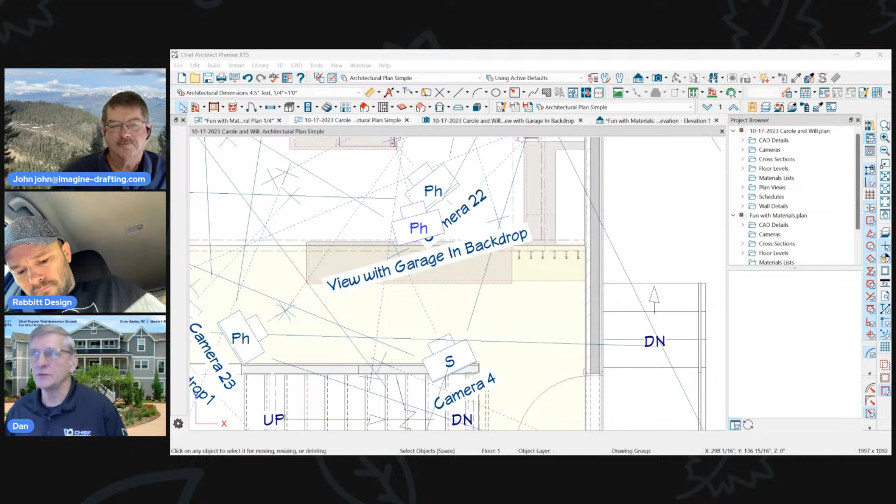We're going to have some fun with materials and textures and all that kind of good stuff, which we've done some of in the past, but I thought we'd just do a class dedicated to that. I know Renee is heavy into materials and textures and all that kind of stuff.

Renee is a, let's turn this off for a minute. Would you call yourself a Photoshop god? Something like that. I've been in Photoshop since 1994, I think. Wow. Yeah. That's before I had my first computer. Yeah, wow, 1994, that is a while ago. Almost 30 years, isn't that crazy? That's almost as long. Well, actually I've been in Chief since '93. So about the same. Cool.

Anyway, we're not going to talk about Photoshop today. Although maybe it'd be kind of fun to do that sometime. Let's not go there, there's so many photo programs out there now. I know Canva is really a big one too these days, a lot of people are using that. So it just depends what you're into.

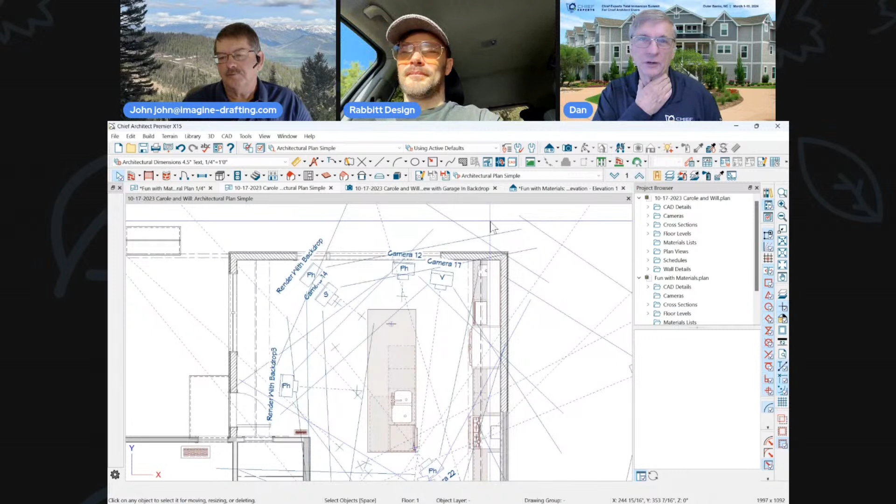Let's talk about textures a little bit. What is a material? What is a texture? You hear these terms, and when you get into a CAD program you might think a texture is something bumpy or that has lines in it, but no, a texture in a CAD program, in any CAD program for that matter, is a photograph. So this countertop that you see right here in this image is a photograph of some material. The flooring is a photograph. The lattice in the back is actually a photograph of their backyard. This is a room addition I'm doing, and I wanted to show them what their view would look like, a small backyard. In that image it appears a little closer than it really is.

So someday I'll figure out how to adjust that. Do you know how to adjust that, Renee, to make that backdrop appear further away? Yeah, you can do some changes in the backdrop setting itself with your edit active view. Is it a change in the image size or is it a change in the backdrop itself? It'd be better if you took it into a program like Photoshop and just expanded it a little bit, made the image bigger. You can also tell it that it's a different degree, so you can narrow the degree or expand the degree to change the bubble that it's being applied to. We'll have to talk about that, maybe cover it in the advanced class we were just talking about doing.

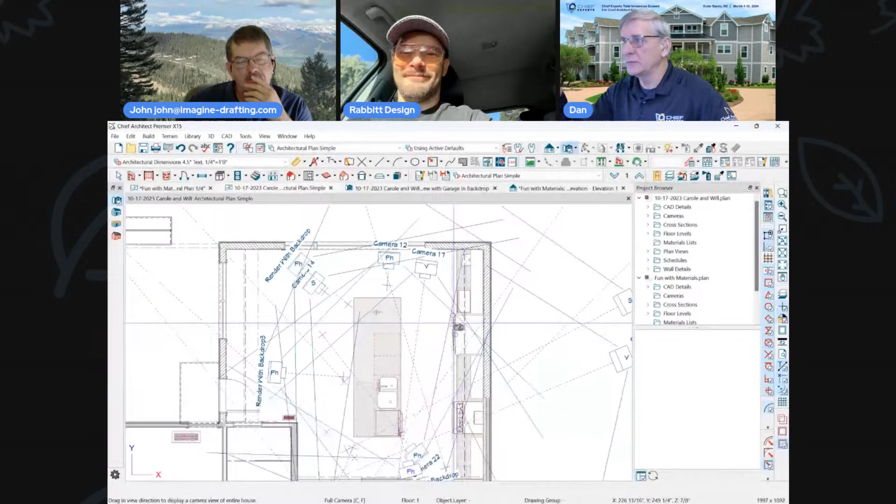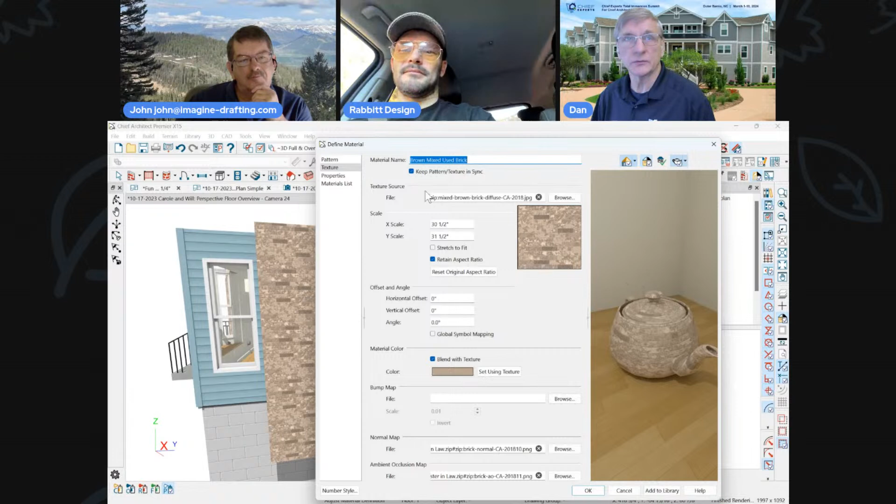But anyway, let's go back into what these textures are. Let me bring up a different view. When we go into a view like this, like the brick right here, you can see the repeating pattern, it's the photograph that is there. When we click on this icon up here, our little rainbow tool, used to look more like a rainbow but it's still got the colors. What is the name of that tool? It's called the Adjust Material Definition. I call it the Rainbow Bacon tool. When you click on that and then click on a material, you can make some adjustments to those materials. You can make them appear bigger, smaller, all sorts of things. One of the things I want to point out is materials have two things associated with them: one is the pattern.

It's the vector-based pattern that you see in your elevations and line drawings. Those are mathematically correct. So when we look at this screen, we see that we're on the pattern - that's the lines that are drawn. And when we look at the dimensions here, we actually see real dimensions, a height and a width. You can type those in and Chief will make those, so when you print this to scale, they'll measure exactly that dimension. So that's what the pattern does.

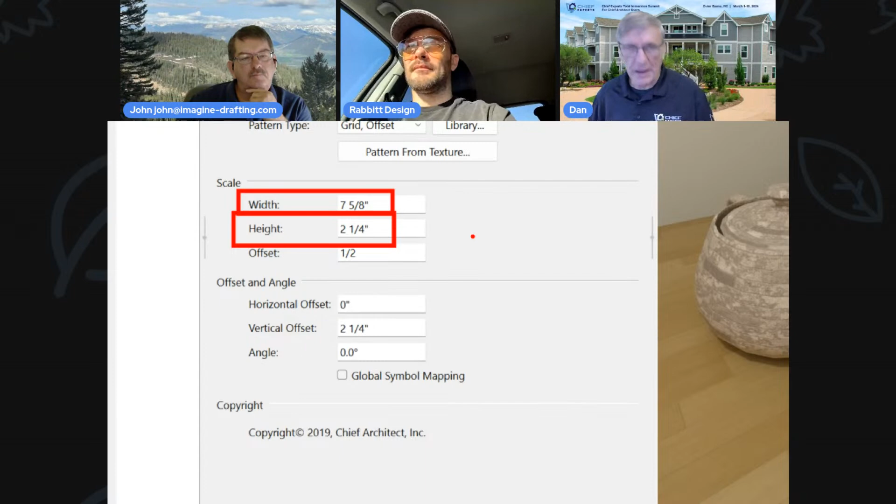Patterns are pretty cool. Chief added a new pattern tool that you can use to create your own patterns if you want to. I haven't done much with that. Have you guys done anything with the pattern tool? That makes it really easy to do complicated patterns without having too many pattern lines, which can really slow down a plan file.

It's nice to be specific about what we're even looking at here. Pattern is going to be a vector-based graphic - mathematical-based lines. Your textures are going to be raster-based images, dots on your screen, photographs. As with any photograph on your computer, there's a bunch of dots that have different colors in them, which is kind of cool how that works when you dig in. If you look at a picture with a magnifying glass, it's nothing but a bunch of dots. So again, mathematical and photographs.

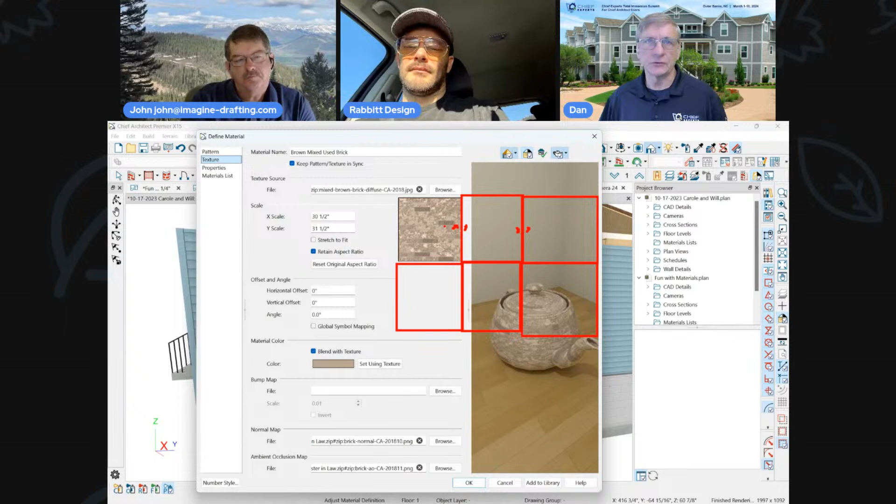What the photographs do is they just tile themselves over the surface like wallpaper. So when you look at the image created in Chief, like for siding and roofing, if it's a really good texture, you can't tell where the image starts and stops - it's called a seamless texture. This brick here lines up nicely with this brick here, and the brick up here lines up nicely with the brick there, so it looks like a clean, consistent image. The siding looks nice because the end of this siding matches the end of the siding there, so it's one smooth image. If we click on that, there's the photograph of the siding, and then of course there's your pattern. So it's simple, but it's complicated how all this stuff works.

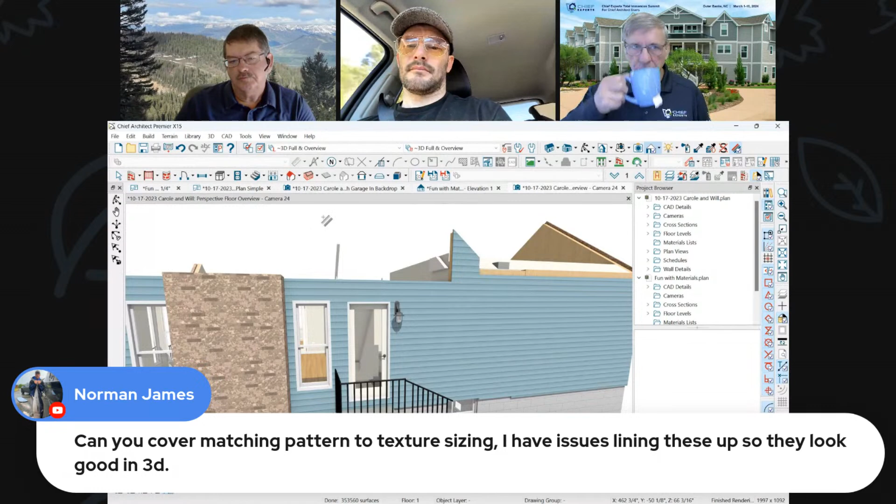Well, while you're in this area, here's a question for you. Can you cover matching pattern to texture size? I'm having issues with getting those to line up. Sure, we can talk a little bit about that.

Let me answer that other question though. Someone sent in asking if I change the color of this brick, can I do it so it doesn't change the grout line? The question is about tile, I think - same difference. So when you use the rainbow bacon tool and click on a material in your plan to adjust it, go to the texture tab, there's a little thing called material color that you can click on, and you can adjust the color of the material.

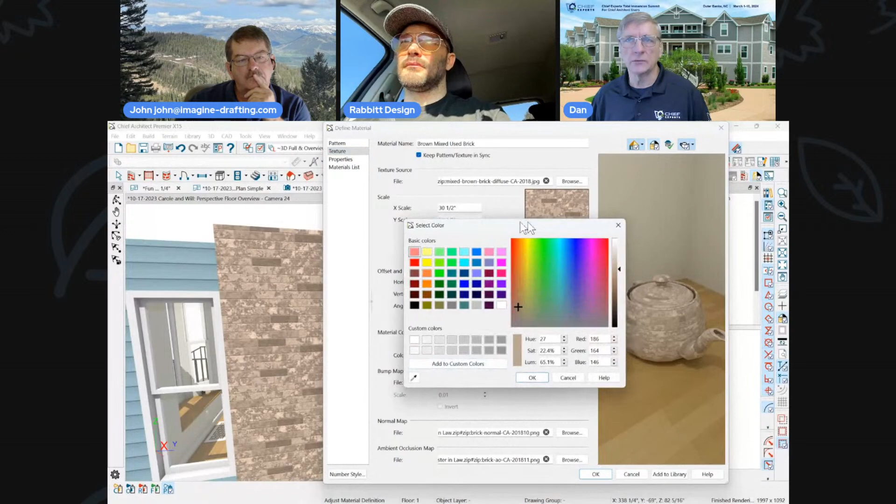So let's click on that color swatch, and I could take this eyedropper here and go drop it on a color. If you actually have a color swatch from Benjamin Moore or something, you could just drop this on that color swatch, and you'll see how it changes the color in the dialog. So when I change this, the brick is now going to become blue, it's going to look like that. But it is going to change the underlying image as well, so it's going to change everything to that new color.

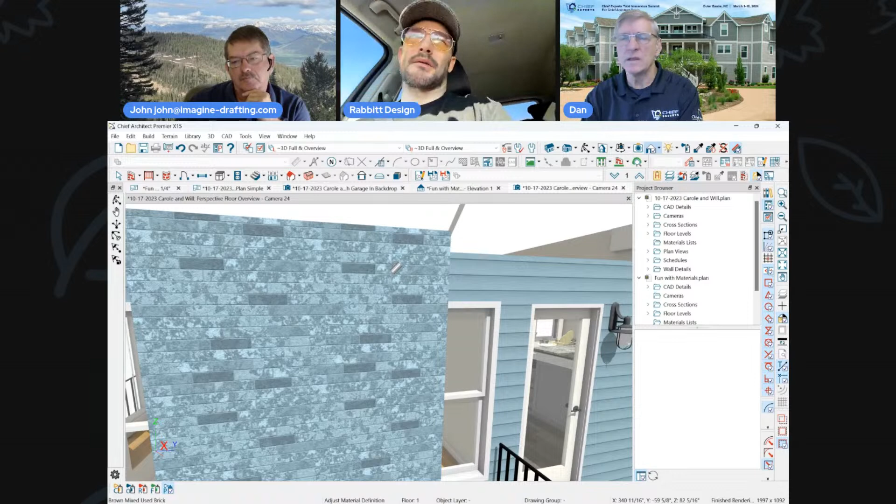That's what it does - it's like taking this picture in Photoshop and changing the base color of it. What do they call that, Renee? Where you change that color? I don't remember. Chief's essentially doing like a blend mode - yeah, it's a multiply. They're multiplying the color you're choosing with the color that you've already got in there.

And we're hoping we change some things there for X16, but we'll see. So you'll be able to pick out a color within a material, you think, to change something? No, I don't think so, but I think we'll be able to do a little bit better of an overlay where it's not affecting the blacks or whites so strongly - it's more affecting the gray tones, but we'll see what we come up with.

Sure, all right, well let's undo that. So what was that other question you just had, John? Matching the texture to the pattern.

That's a little tricky. Okay, so watch what happens. Let's say that this brick does not have a pattern, a vector-based layout for it, and I click this little button here that says pattern from texture.

Pattern from texture. It's going to look like this. See how it's actually kind of where it sees all of these different images here, it's kind of making that part of the pattern. That's going to create a lot of lines in my plan. Now I can adjust that so it makes it simpler, not as complex.

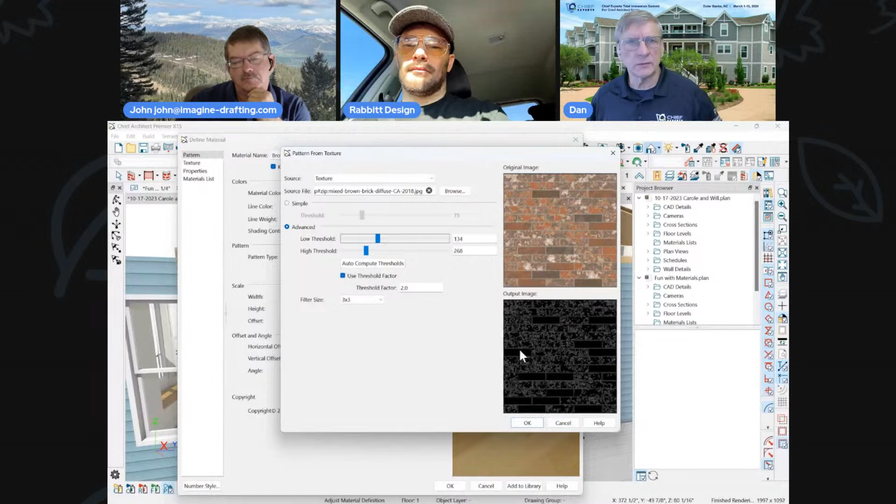Is there a way to invert this? I don't remember how this works. I don't use this very often because it doesn't work that well. No way to invert it. And actually, I really discourage the use of that tool because it creates so many vector lines that it can really cripple a plan. The math is just going to go crazy.

So if I look at this now, see all those little lines in there? Chief now has to calculate all of those, mathematically calculate where all those lines are. So it really takes a chunk out of the program. If you have a fast computer you probably won't notice it, but yeah, it will definitely slow it down.

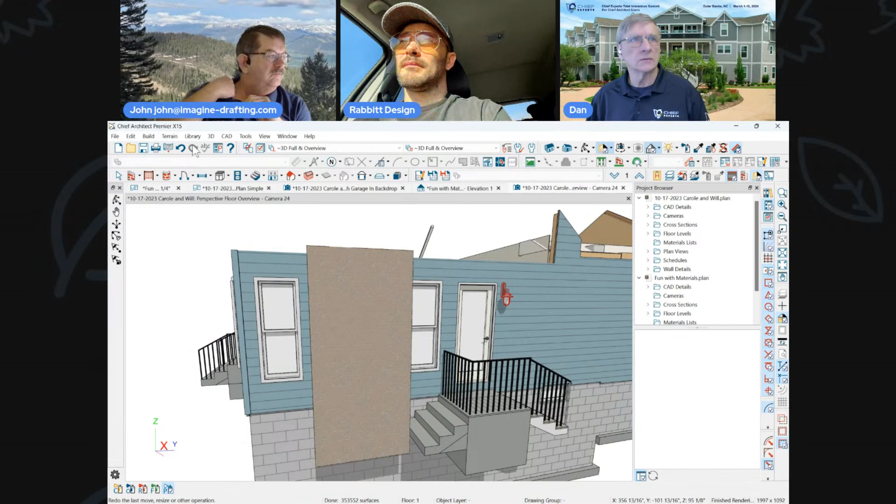So how would you handle that, Renee, when you need a pattern? Will you open your brick texture again, and then in your texture panel—this is where I literally just count the number of brick in that image, top to bottom. If I know how many... I can't quite see it, so I don't know how many brick are there, but let's call it 5 brick.

I just do 5 times 2.5 if I've got a 2.5 brick, and that should be my Y scale, right? Once I've specified that, it's now created a brick that's 2.5 inches tall. Then you can go to a pattern, pick a grid, and say that it's 2.5 inches tall. And then the last bit is maybe you have to change the horizontal or vertical offset to get it to line up perfectly.

Yeah, you're talking about down here, adjusting that material to move it around. We were just discussing that a little bit here. So uncheck 'keep pattern and texture in sync' at the very top.

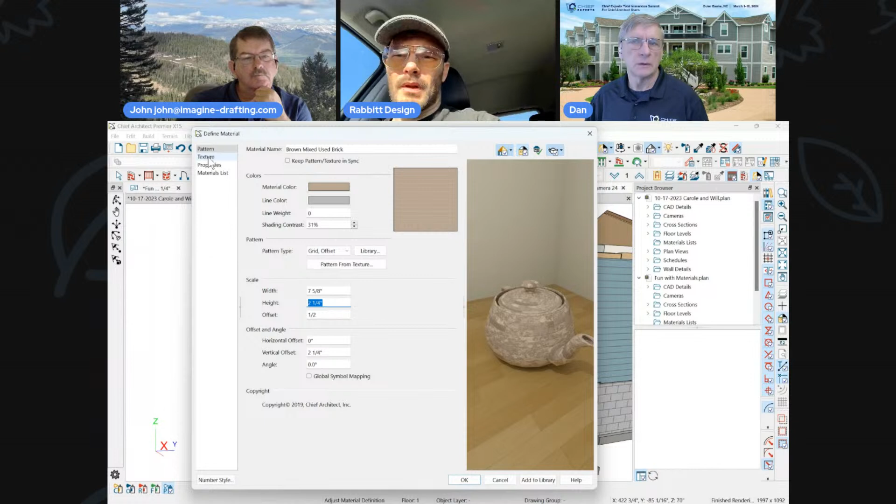Okay, and now you would specify whatever your brick size is, and you'd have to know exactly what it is, so you'd have to count the number of bricks in that image. 7 5/8 by 2 1/4. So I will put that number here.

Now go to—you'd have to count the number of rows of bricks in the image and multiply it by that number, 2 1/4, or 2.5 with the grout line, whatever. And then that would be your Y scale for the pattern this way. Okay, that would be this number to get it right.

You know how I did this? I actually created this brick—a cheat. I go like this, I take and I go into an elevation. And let me get to the right plan here. Where am I at? Come on.

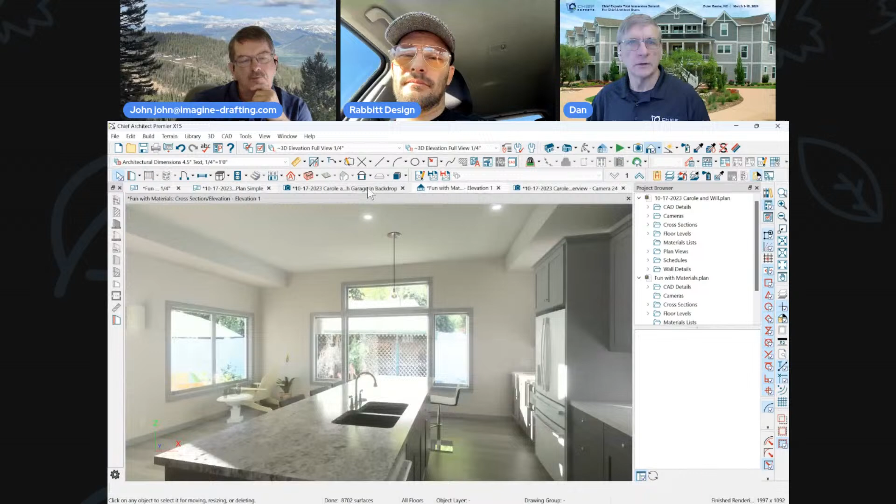Where to go? Here we are. Okay, so it should be a chimney there. So I go in here, and to get the pattern I want, I'll switch to a vector view—well no, to get the image pattern right, I'll just go ahead and draw a box on my wall like this, the right size.

So if this needs to be 8 by 2, I'll just keep it simple, even though I know it's not that. And I'll just kind of put it on top of one of the patterns here, even though I know it's not quite right. Then I'll switch to my vector or standard mode, and I'll just take that same brick and put it where I need it to get the pattern right.

And then I'll just go to my tool and start adjusting these numbers a little bit until that fits. So if I add an inch to this, and I'll leave the... you might have to turn retain aspect ratio off. Okay, so now I just stretched out my pattern this way.

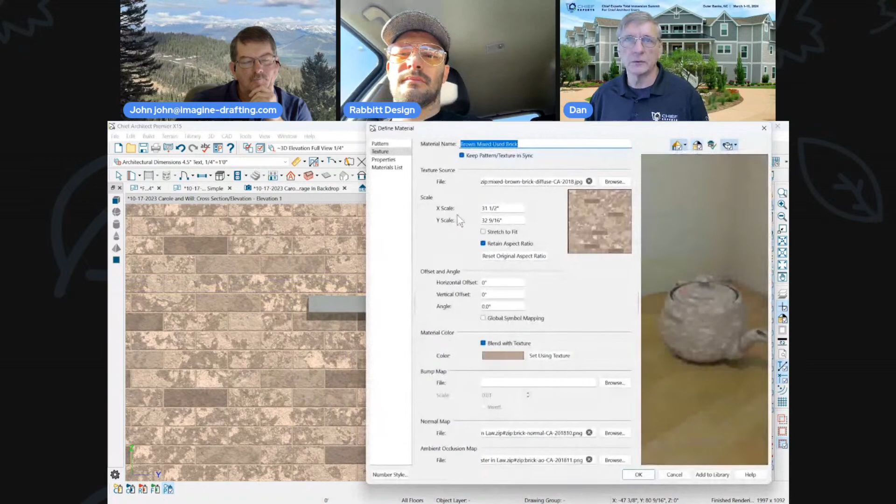So again, if I go in here, let me just make that bigger—I'll make that 50, and you'll see how you can stretch the pattern one way. Actually, I bet that turns itself back on. You got to watch that because it turns itself back on every time. Let me go turn that off. So this is how I've always done it.

I'm not into math, so I just go like this, and it's always worked great for me. See how I can stretch that brick out but I can keep it the same height. So that's what I'm doing. Just imagine you're taking that picture and stretching it, and that's going to stretch the pattern that's on the picture. So you can take any tile and do this to it.

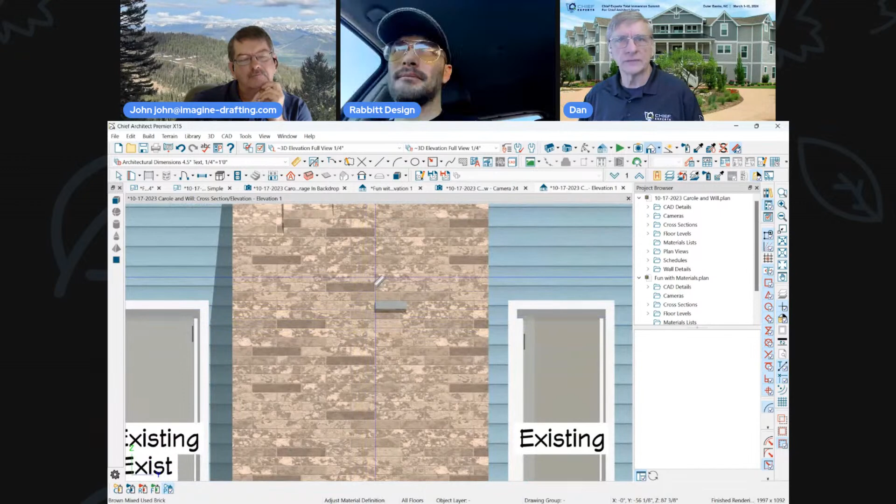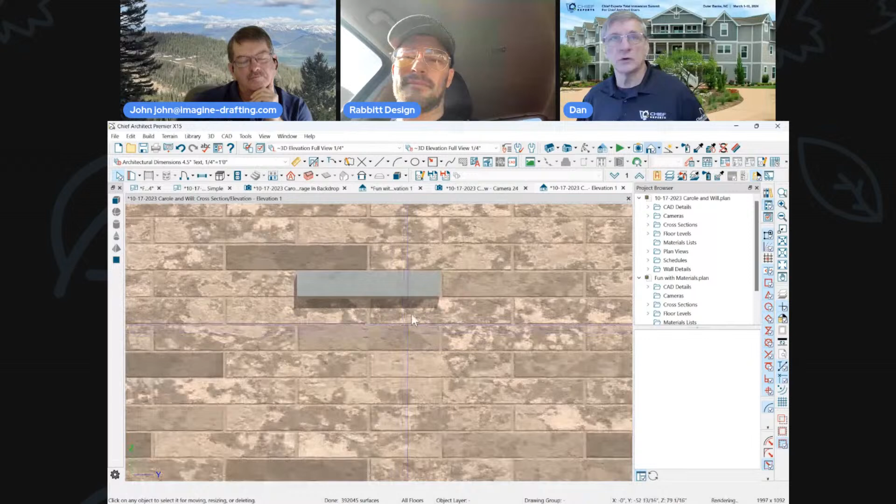I was doing that with some bath tile yesterday where I needed an 8x10 and I had a 12x12 tile. So I was just changing the image, and then I put a little 3D box on there so I could check the size. If I like that size brick, I'd make this like this, and stretch that out here, that's 2 inches by 2 1/8 by 12 and a half. And I would just go into my material and change that under the pattern, so that'd make that 12. So you just sneak up on it. Pretty much. It works.

So the value in doing it the mathematical approach is that we can get the pattern file to match up perfectly very easily. Yes.

So if we had more time and you weren't driving your car, I'd say show me that, Renee, but it's probably not a good idea right now. Well, here, no, do it. We can do it. And this is a pretty simple approach.

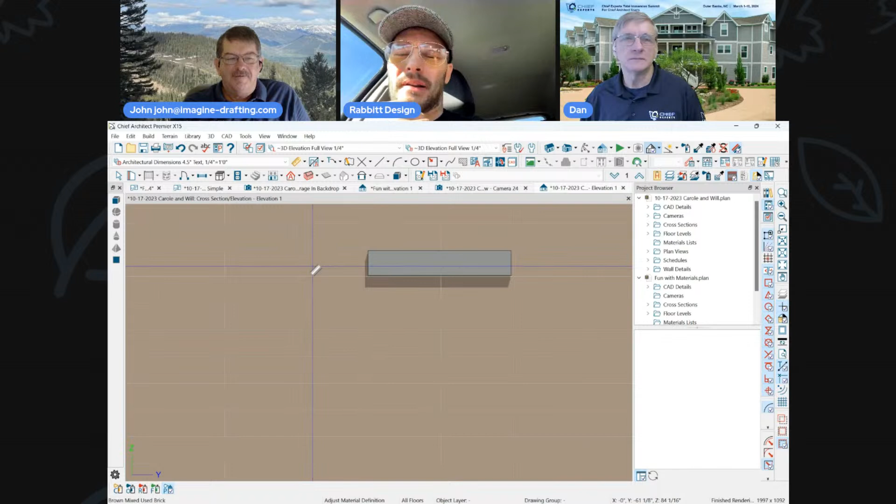So pull that adjust material up again. Okay, go to the texture panel. Uncheck keep pattern and texture in sync. Count. Someone tell me the number of height. 7, 8, 9, 10 rows. 11, 12, 14 high. Okay, now do in your XY, do your 14 times 2.5.

14 times 2.5. Get my tab key. This should be your XY scale, not a horizontal offset. No, that's true. So I'll just put it there. I'll just uncheck that, put that there. Let me take that out of there.

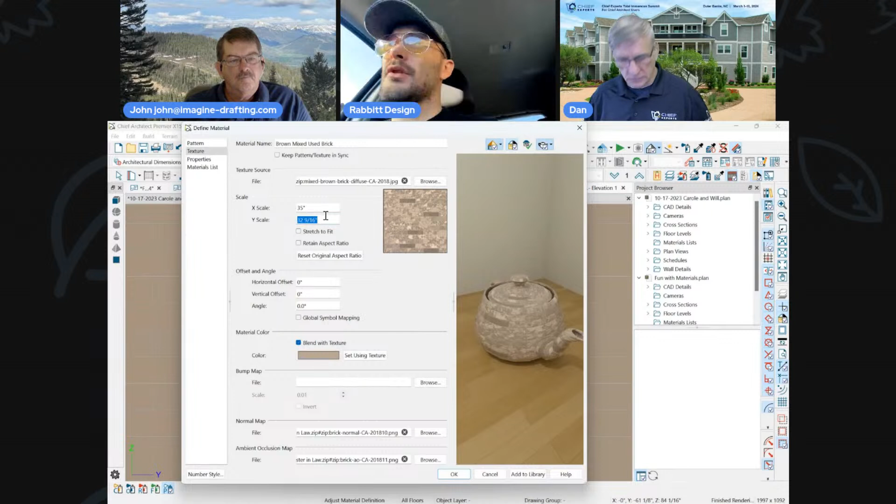Okay, but you see how I multiplied that right inside one of the chief boxes? Now we need to go 1, 2, 3, 4 wide on the brick. Show me the bricks left. Yeah, there you go, 4 times 8. You put those in the wrong way.

X is on top, right? I can't quite see it either, but X should be the scale, the up and down should be... so that should be 35. And this should be 32 by 35. Okay, those were the numbers we just put in. So that math I just did now.

Now go to my pattern. Now go to your pattern. Pick a brick lay. I call what? Is it already a brick lay? I can't tell. Pick a brick lay pattern.

You talking one of these? Yeah, what do they call it? I can't remember. It's just a grid now. They call it brick, they call it grid. They used to call it brick, they don't call it brick anymore. It's called a grid. Is it grid half off or something like that? That's right, we need the grid that is offset.

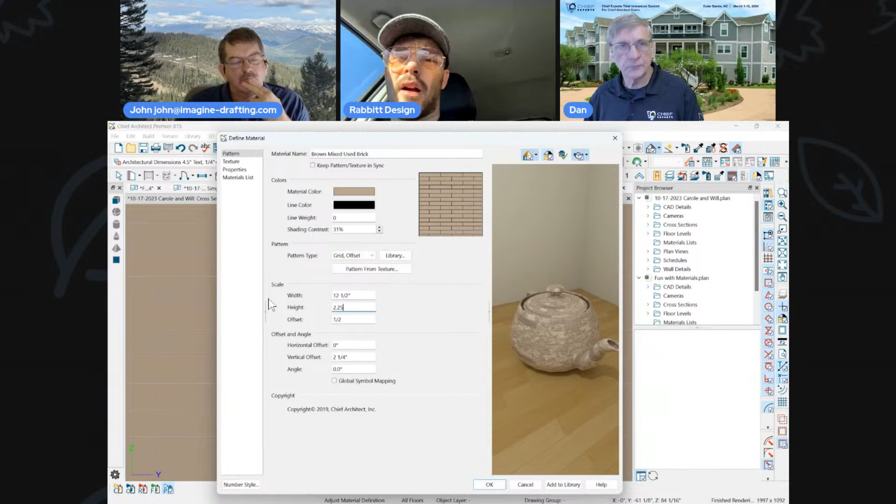Yeah, there you go. Let me make the lines darker so you can see the lines. Now you can see the lines. And then again, the height. Now we're adjusting the height of the actual brick size, not the image. So this would be 12 and a half by 2 1/4, 2.25. There you go. And now once you have that set, you should be able to keep pattern and texture in sync, and if you change the pattern size, it will change the texture size.

Okay, so there's my brick. And if I change, so that's lined up. Let's see if I switch to my standard view. No, they're not quite lined up yet. So you might have to change the offset just a little bit. Just make sure you're unchecking the pattern in sync.

You know what I did is I put it on the 8-inch brick, not the... okay, I did it wrong. I did the math wrong. I did 8 inches instead of 12 and a half. So, because that's what 12 and a half is. But I think I get the idea.

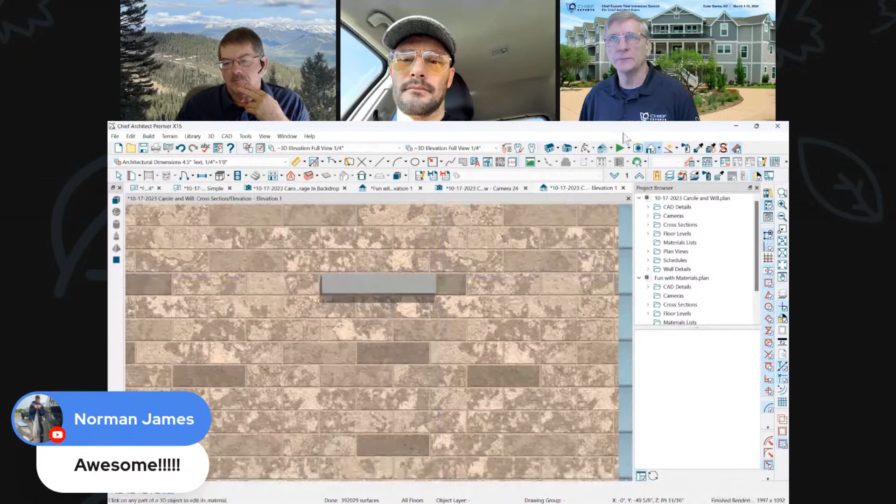Okay, let's move on. Norman feels like there's a specialty tile grout tool coming on, Renee. That's Photoshop. No, actually, that's Substance Player. Dustin Cruz already made that for Chief Architect. There's a question about that too. So, Norman, about talking about that.

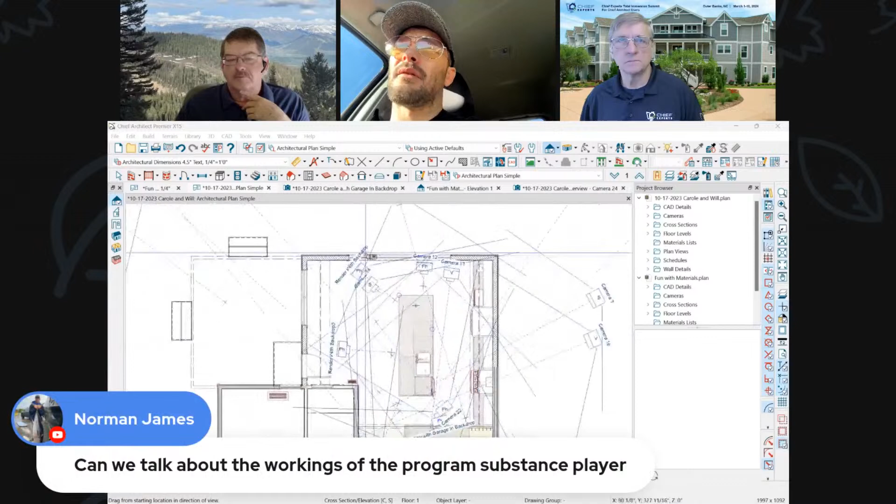If you want to make your own tile, go over to Chief Talk, in the symbols and content section. It's pinned as the third post from the top, and it's the Substance Player. We looked at that when we were in Coeur d'Alene. That was pretty cool. So you just go to Chief Talk, let me go run over there quick.

Wasn't there some talk about the guy that does all the materials? If you need a material, just let him know, and he'll do it. Yes, that was Dustin Cruz, Dustin at chiefarchitect.com. Send him an email so you don't struggle with your materials.

If you want a new material, just let him know, and he said he'd make them. So is that under symbols and content? I think it was, wasn't it? Yeah, so you got to be signed in. Am I not signed in? No, I'm signed in. Custom material generator with substance players.

That's the one you're talking about? Yeah, that's it. And they have a wood builder in there, textile builder. It's great stuff, they do. So if you're into creating your own materials, you could get this tool here, and here's all the downloads that you would need for this.

I don't know, did they have any direction for this? Any videos or anything? I don't remember if they had. Yeah, he's got some pretty elaborate direction in there. This is not for the faint of heart. This is something, if you're serious about materials and you want to get into it, Chief is giving you some tools to do this. It's pretty cool how it works.

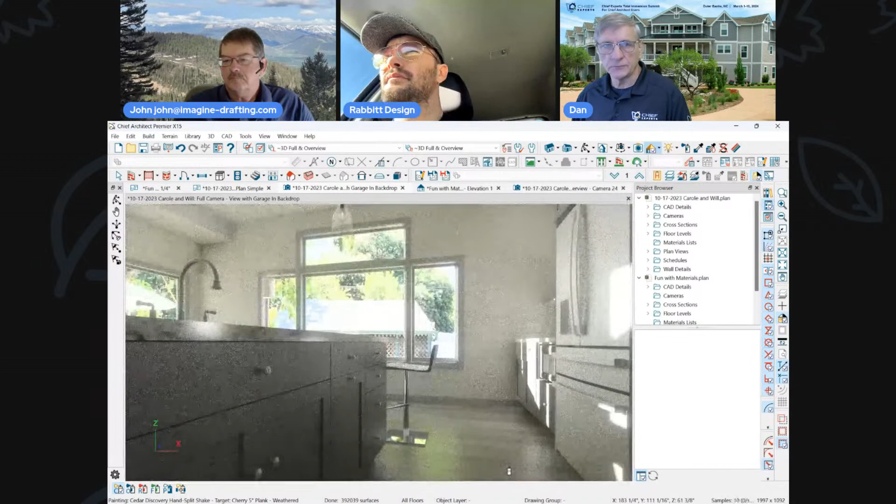Someone was talking about their materials looking flat. Let's see if we can address that a little bit. Let's go into a 3D view here. Let me just do this one with the backdrop, and let's make the flooring look like it's got some definition to it. You can see it does have a little bit now of definition. Let's try to give it some more. So Renee, how would you do that?

You got to make a bump map and a roughness map. So how do we make those? We need the substance tool. Substance will do it for your flooring, absolutely. So that tool is really great for that. Otherwise, I'd be in Photoshop making it.

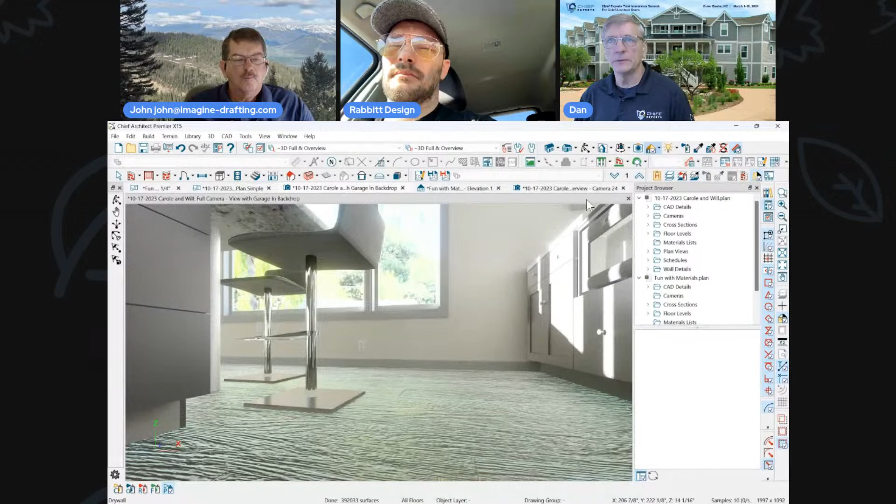So I'm doing it right within Chief without doing anything more. It was really... let's go 0.1. Some materials this works for. Obviously for this flooring, it's not what I want. That's going to be a little bit more advanced as well, so let's not go there right now.

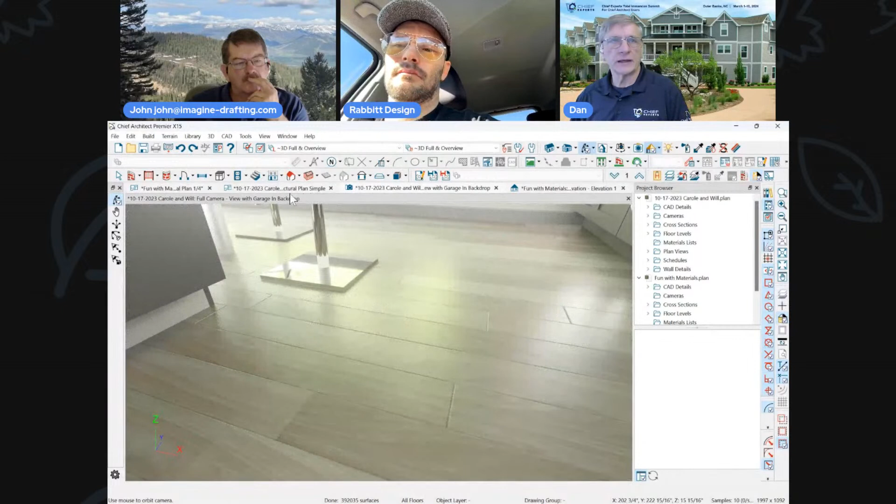As you can see, when you're into that world, and it's all coming back to me now from our meeting this summer, the actual wood look flooring is one image. But there are other images attached to it that produce that roughness. They don't look like the wood, they just look like roughness, and that's what gives the material its look. Chief combines those to give it that depth of field look. So it's kind of interesting how that works.

Let's go do a couple other things, unless you want to comment on that some more. When we get into this kind of stuff, we're touching into third-party programs like Photoshop. I had a really long conversation with Ryan, who's head of development for the rendering part of Chief, and maybe we can integrate some cool features for the next versions.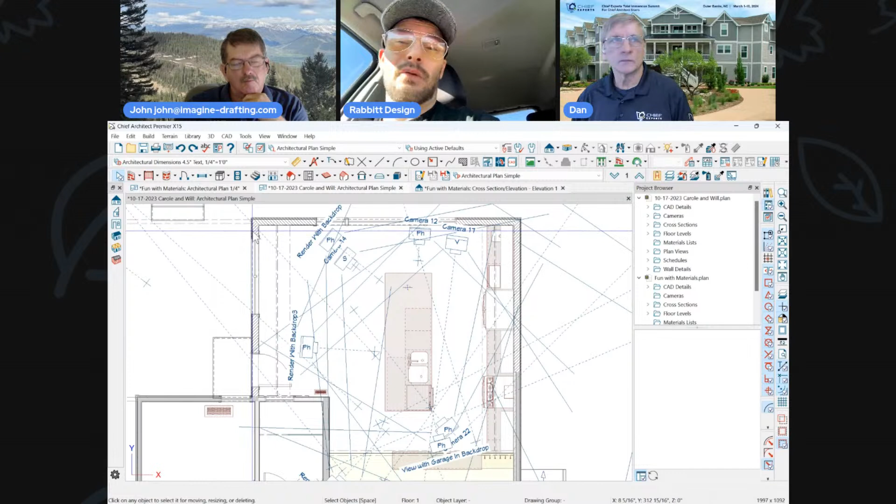Okay, let me talk about a couple of settings you should always make in your renderings, and then I'm going to show you how to create some of your own materials. When you're into a view like this, there's a few adjustments you need to make for Chief to work a little bit better. First of all, you have to switch to PBR, the physically based rendering. So this standard view looks like that.

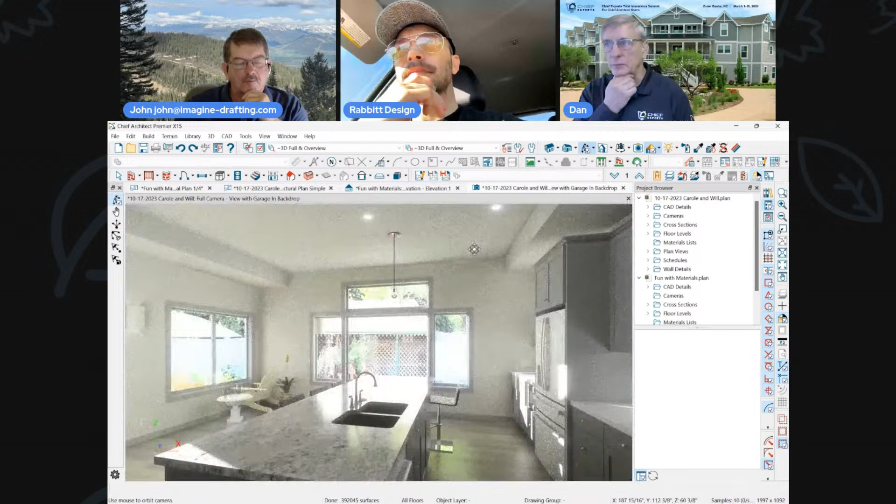In most cases, that's fine if you're just talking to the homeowner about something. But if you have a good computer, I've got a 4090 video card on mine and tons of RAM, so I've got a nice fast computer. Whenever I move this image, it regenerates quickly, and boom, there's my image. It looks good. So that's the first thing I've done, I've switched to physically based.

I think, Renee, you have yours set up to just come up physically based, don't you, whenever you bring a camera up? Some of my cameras, yeah, or I have it on the alternate. And that's a default setting under camera tools.

So if you want all your full cameras to always come up with physically based, set that in your default settings: click the little wrench icon, go to default settings, camera tools, click on the one you want, and change it to the view you want. So if you want all your 3D camera views to be physically based every time you drop a camera, that's all you have to do to make that switch. Now, that only changes it for this plan, not the whole program. So if you want it to always be like that, do it in your template.

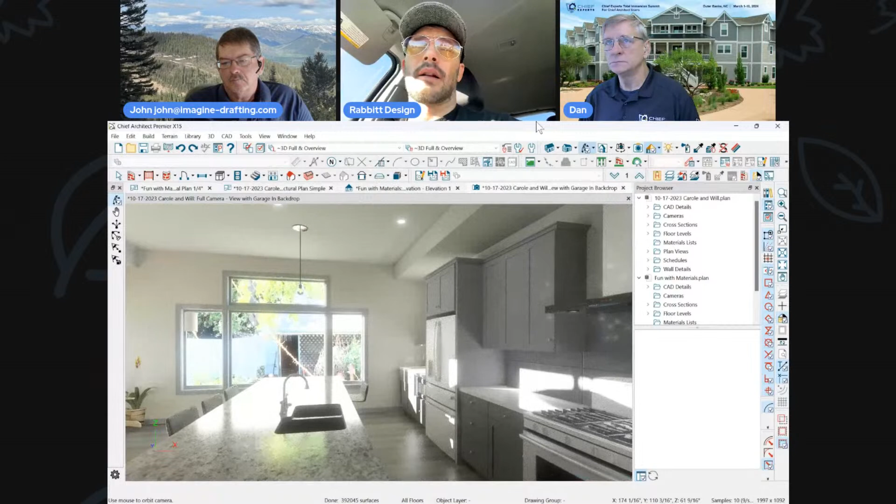And then I like to do it as the alternate method, so if we right click and drag a camera, it'll do physically based. Oh, okay, that's a really good idea. I like that idea, in fact I should set that up in mine.

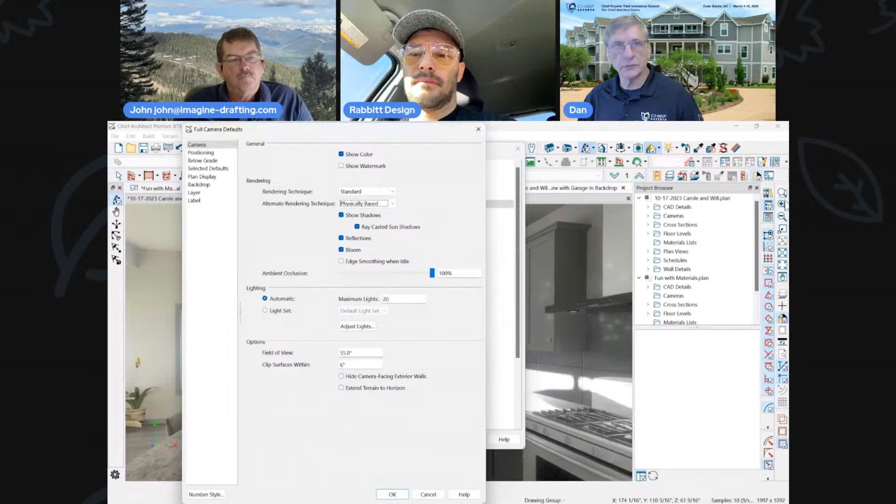So if we go to our camera tools, I don't even use that, but now I will. I'll have standard here, but for my alternate I'll do physically based. So here you do your left mouse button for the standard view, and your right mouse button to bring up the alternate view. I'm going to change that in my template, so when I go back to my floor plan and want to bring up another view, I'll just drag my camera with my right mouse button instead of my left, and that'll bring it up in physically based, so I don't have to switch it.

Thank you, Renee, I didn't even know that. That's pretty cool. Well, I think we can go home now. We learned one thing today.

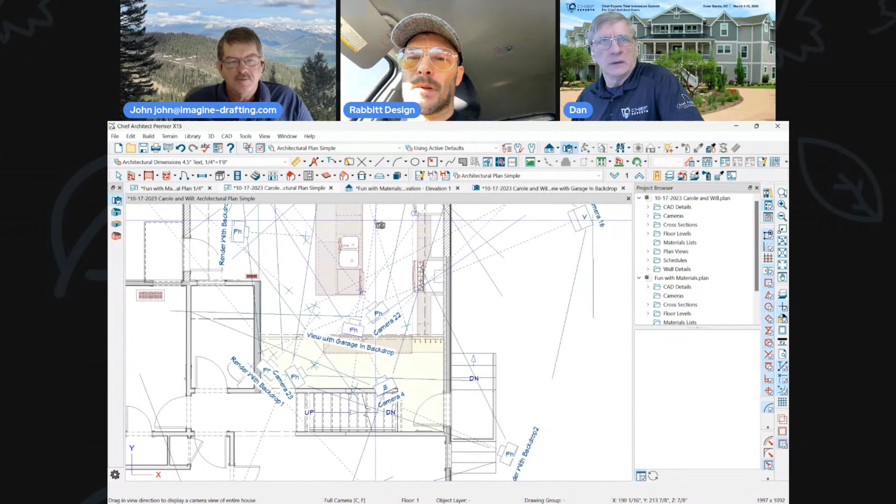So all of your cameras have that setting in them, so you can make that switch to whatever you want. Let's see how that works with the overviews. Let's go into there for a second. Perspective full overview, we don't have an alternate method there because you already know to use your right mouse button, it just brings up a view.

You have an alternate between elevation and backclip? Yes, those two do, and backclip has the same thing. It's just the ones where when you click a button it pops up the 3D view, those are the ones that won't have an alternate. The perspective overviews take up less in terms of rendering, so I like to just set those to ray trace.

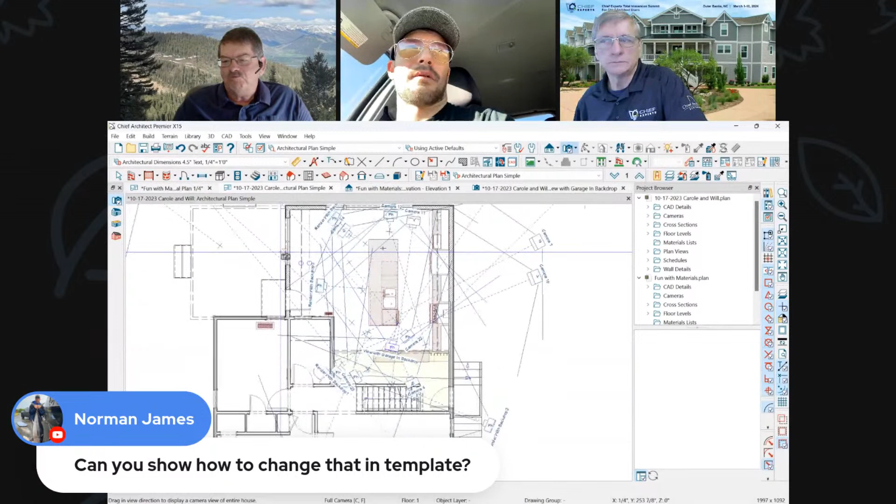Can you show how to make that change? Keep in mind, if we're on a Mac, we don't have that ray trace option. Oh, that's right. What do you want to show to make that change in the template?

So if you go into your preferences, and go to new plans, whatever's listed under plan template, that's what you're opening every time you open a new plan. In here I have my template, my X15 plan template, so I could actually open that actual file, or browse to it.

Does this allow that? No, that stays open, could I open it from here? I don't have it here. Oh, you have to go browse. Never mind, go open that, whatever's listed there. You go open plan, then open that template, make your change. A template's just a blank plan, nothing more, nothing less. Make that change, close it. Next time you open a plan, that setting will be there. It won't affect any plans you've done in the past, only future plans when you go file new, opening a copy of whatever is listed under that dialog.

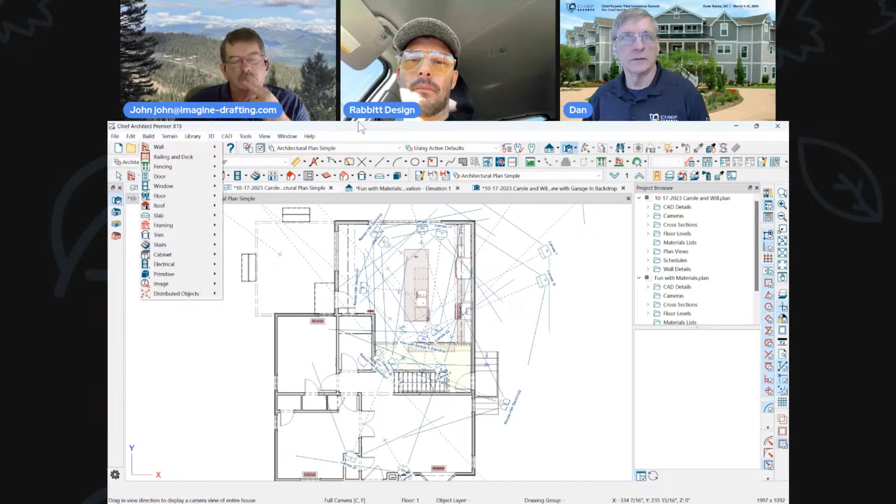All right, let's go do a few fun things. What are we doing? Okay, we've got 25 minutes.

I set up here how to do this kind of stuff. You guys ever have an interest in bringing in pictures of people, or putting them on TVs or signs, creating your own signs, that kind of stuff? It's really easy to do. You could do this with any image on your computer. Of course, the problem comes in if you need to show it in a vector view, then you're not going to have the vector image of those things unless you have a CAD drawing of the sign you're creating. So we're going to understand that difference between vector and render, whereas this is rendered.

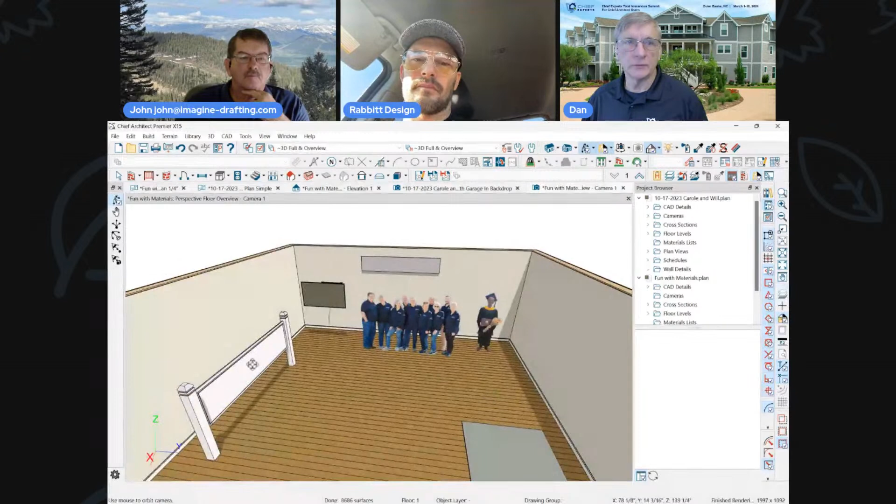Now, if I switch to vector view automatically, see all of the images on the signs go away, because that's the material. This is still going to work in a vector view. So those things work fine.

And those are kind of fun images to play with. They're really easy to do, but you'll see they're not really 3D people, they're just flat images, which a lot of Chief trees and things like that are flat images too. Although they have more and more 3D stuff now. They're doing a really good job with their 3D trees. I'm not quite sure how they're doing it, but it's kind of like their trees are drawn in little square boxes that attach pictures of leaves to them.

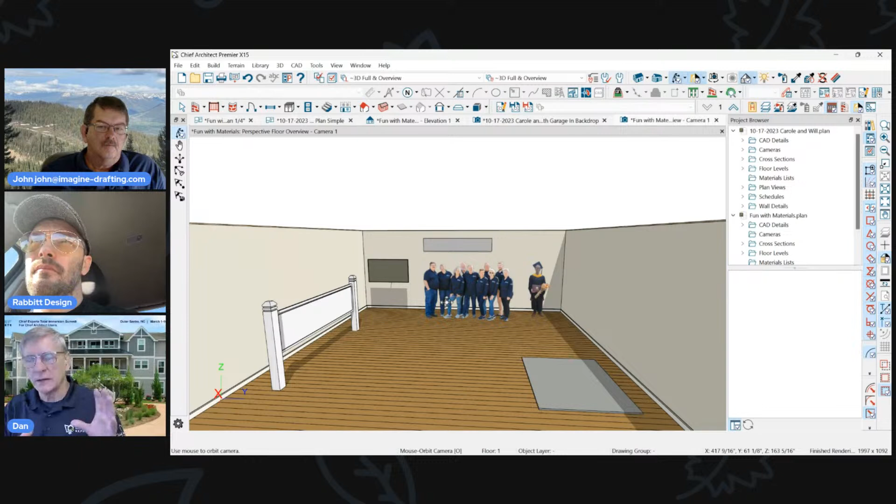Am I seeing that right, Renee? On some of their trees, say that again. So in some of Chief's 3D trees, when you put a tree in and it's 3D, and you're in a render view, it looks like real leaves on the tree. But when you go to a vector view, the leaves look square or rectangular. It's a PNG image, which allows transparency, and it's applied to a square. Yeah, much the same as this, where you're just creating that kind of an image.

So I'll show you how to create some of these things. They're kind of fun. There was a question about grass along those lines.

Okay, grass. Well, let's cover this in X16. In X16, I believe they're giving us a clipping mask, so that's going to make it a lot easier to do those kind of things. So I assume what we're talking about would answer this question.

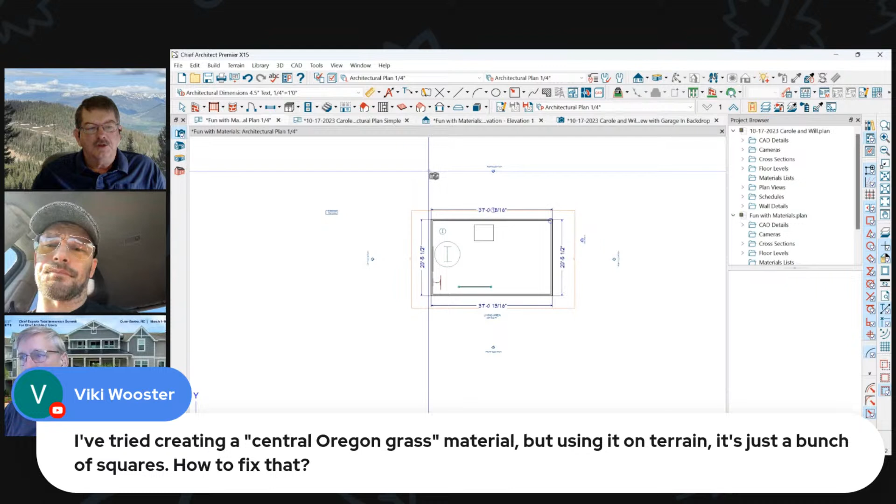All right, let's put some terrain in. This is X15 only, older versions don't have that. So when you bring up your 3D view in this version, let's get out of these. I'll say no. All right, so when I bring up a 3D view of this...

This isn't too bad, but you can see the pattern here, you can see where they repeat. I can't quite see it this direction, but I can definitely see it here. So that's the images repeating. But the real question was, how do you do real looking grass? So Chief has given us a new tool that we can do that with.

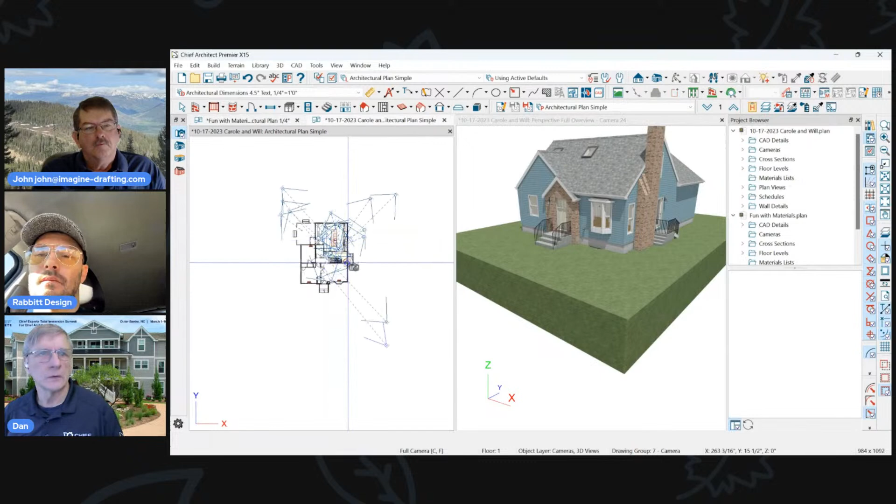So if I go to... where'd my terrain go? Oh, I'm in the wrong one. No, where'd it go? Oh, I have it turned off. Let me switch to this one. Oh, let me switch to all on. I had my terrain turned off, I was messing with this before. Which one did I have it turned on?

All right, sorry, I had it turned on before, but then I turned it off. Let me just go into my layers and turn it back on. Terrain perimeter... oh, it is turned on. Do I have it on the lower level? Oh, come on. Well, let's go switch to all layers on. I know I have one in here because I see it. There it is, and it's under... no, that's not it. I just click on this to find the layer, I guess. Terrain perimeter, oh come on, Dan. There it is, all right. That's a different plan, well I'll just do it in this one. That's the terrain perimeter, all right.

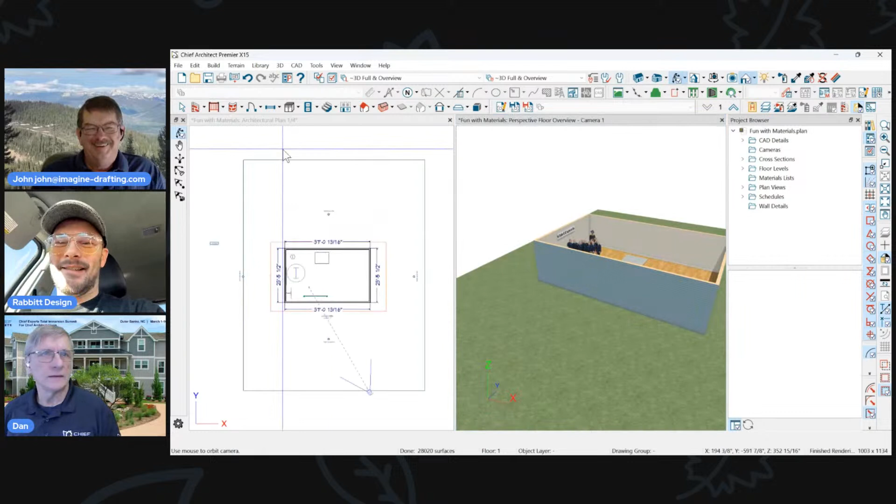So Chief has given us a tool. Oh, I did put it in that, I was mixed up between two. It's not even Monday, what's wrong with me? God, it's the 5th Monday of the week. Is that what it is?

All right, so if I go in here, we have a new tool under... where is that again? It's under terrain, it's called... where is that? Feature, where'd they put that? I don't use it very much. Polyline grass region, okay, it's under the whole category called grass region. So when I click on that and draw a box on my plan, I guess I have to be on the right one.

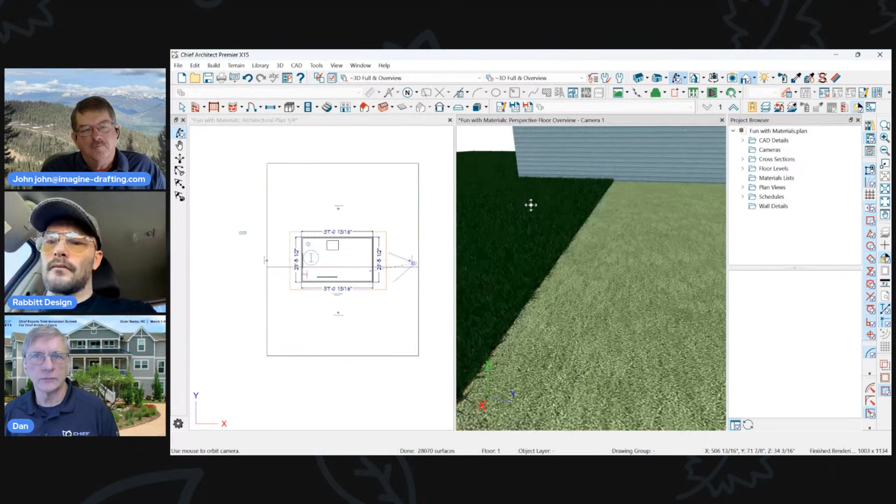You can draw grass wherever you want it to be, and this looks like real grass. You can do things with this grass too, and if your terrain is contoured, the grass will follow the contour. Then you can put garden beds in it and stuff.

What I could do is open the dialog for that grass, and we can see, where's the height? Here's the height. So if you want really tall grass, you could grow it and have really tall grass. That eliminates the issue of grass not looking real.

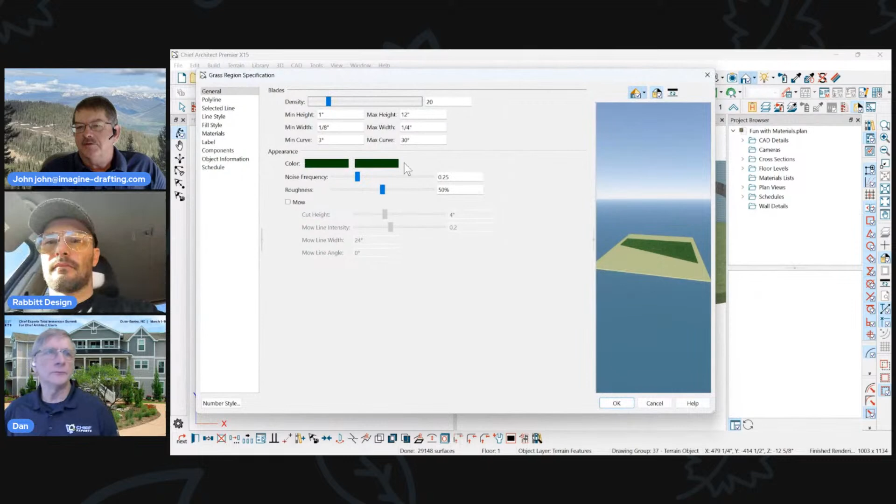So if you're doing landscaping and you want to show this as really good looking grass, there you go. You can change this. He was trying to make a special kind of grass from Oregon. We could change the color. You can make it rougher and smoother. You can mow it. I don't quite get what that means, but I just haven't been using this that much. I don't do that much landscaping.

But if you want to make it look kind of dried out, you could go more like that. And there you go, it needs watering. So you've got some flexibility with it. You can make the blades bigger and smaller, I think. So give it a try and see if it does what you want it to do.

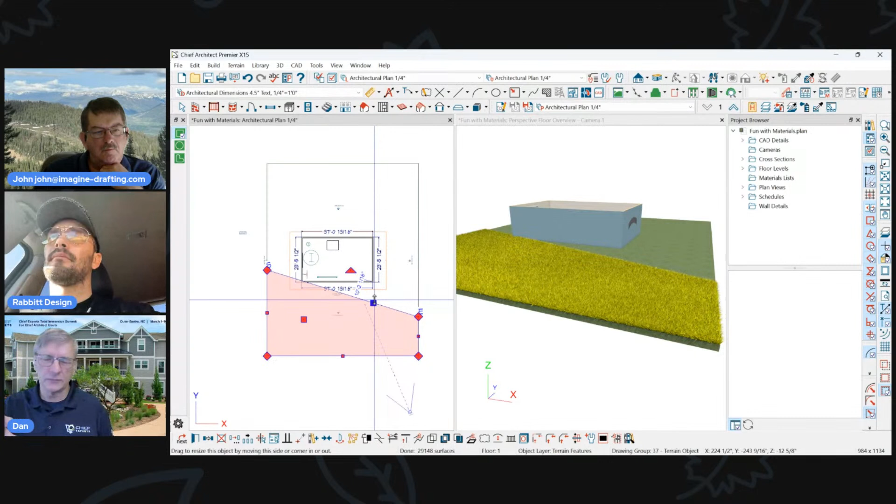But that's just a different way. I'm assuming Chief is doing some of this stuff because this is some of their internal guts of their program now, allowing them to do more of these kinds of things without eating up so much horsepower from our computer.

Well, let's go create a couple images real quick. Let me show you how to do this group of people. Here's our team from the summit that's coming up. So these kind of items are called images. Chief has images in its library of different people and things like that.

They used to have more, I think they took a lot of them out of there. So let's go create that. What you need is a picture, a photograph of something. So here's the photograph that I took that picture out of.

We have to get rid of the background, unless you already have a white background or a solid color background, in which case it's not an issue. So you do have to get rid of the background. You're going to have to cut the people out of the image. That's the one caveat to this. Chief's not going to do that automatically.

In fact, let me try that real quick. I had never tried that before to see if that works. Anytime you want to create new materials, you open your library, and I have my browser floating because I always keep it on a different screen. Let's click on the folder where I create and put miscellaneous materials. Whenever you're in your library and you right click on a folder, you want to create a new material.

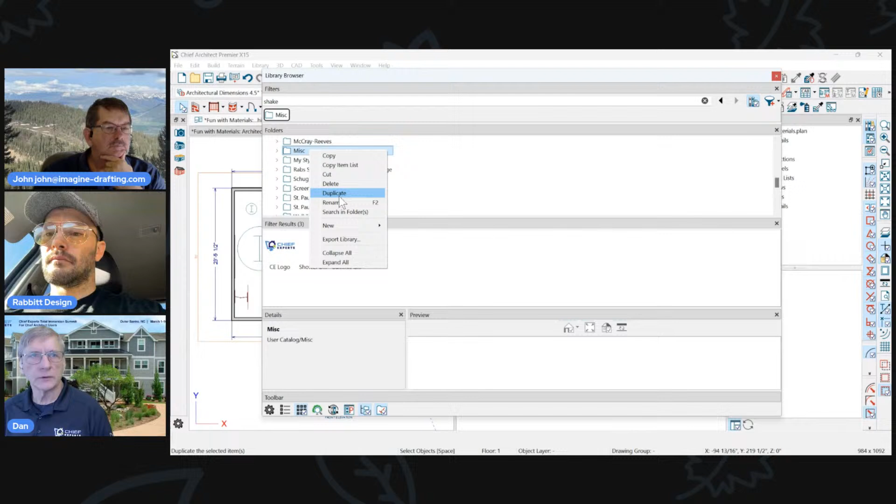Here we're creating a new image. So let me just go select that one. I'm going to browse to that picture. I'm going to get the one with the background and see what happens. I meant to do that. And then I've got to set the transparency.

Okay, because this is a JPEG, it doesn't have a transparent background. So I'm not going to be able to set a color very easily, because you have to pick out a color that you want to be transparent. So this isn't going to work very well—it's only going to take out a certain bit of stuff, not the whole thing. So you do have to have a solid color background.

Now, if you're a Photoshop user like Renee, it's like, poof, done, right? Is that right, Renee? Oh, yeah, that's quick. Yeah, so I use a little program because I'm not a Photoshop user.

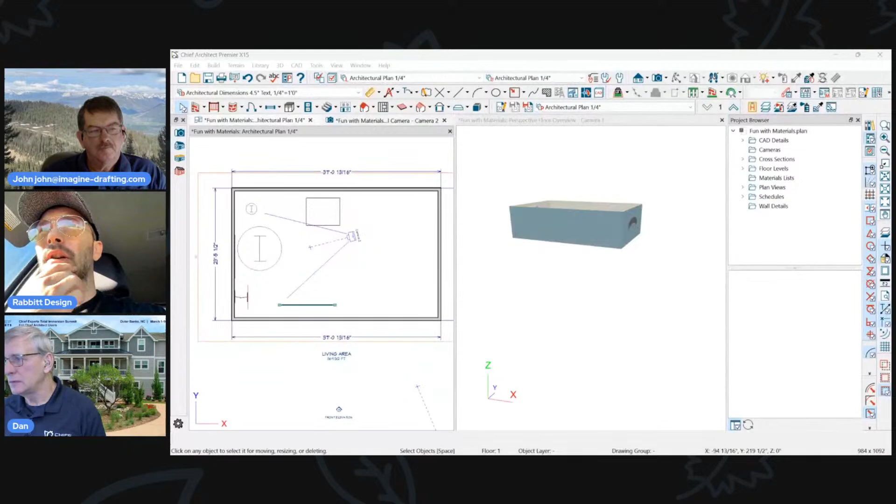That program you used worked really well. Which one was that? I saw it when we were doing our Kansas City session. Yeah, that was the online program I use. It's not totally free, but if you do a lot of this stuff like I do, it's just $3 a month. It's not a big deal.

It's called... let's see, it's called, what's it called again? I just had it open here. Let me go to my history. Oh, come on, Dan. It's called... I had too many open. Here, let me look it up. I had it open and I restarted my computer and closed it and didn't restart it. So let me just go into... I knew this was going to happen when I restarted my computer. Then I got distracted.

Oh, come on. It's called Clipping Magic. Yes. Okay, so let's go to Clipping Magic.

You can even try it for free, I think. It looks like this when you open it up. And I do a fair amount of this kind of stuff because I do a lot of marketing images and things like that, so if you're looking for a program, it's really, really a slick program.

So all I'm going to do is take that picture that I was showing you, and I'm going to drag it onto the screen here. So I'm going to drag it right here, and it's going to load it up, and it's going to split the screen, and it's going to cut everything out except the people.

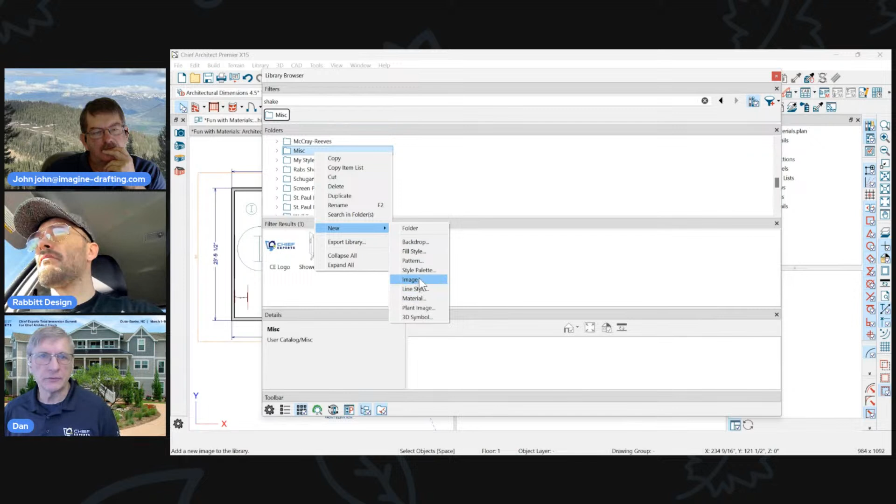And then I'm going to go select that file. I'm going to browse to it, select that one I just created. And there it is. It's what kind is it? It's a tree, shrub, flower, rock, people. Okay, and 2D plan symbol.

So you could select different CAD blocks to use on the floor plan. Because you got to have a 2D image associated with the image of the thing. And you could even draw something out if you wanted to. It's going to be 6 feet tall.

That's about how tall you are, Renee, right? I think you were the tallest one there. You're probably 6'2". I don't know. How tall are you? Just under 6 foot. Okay.

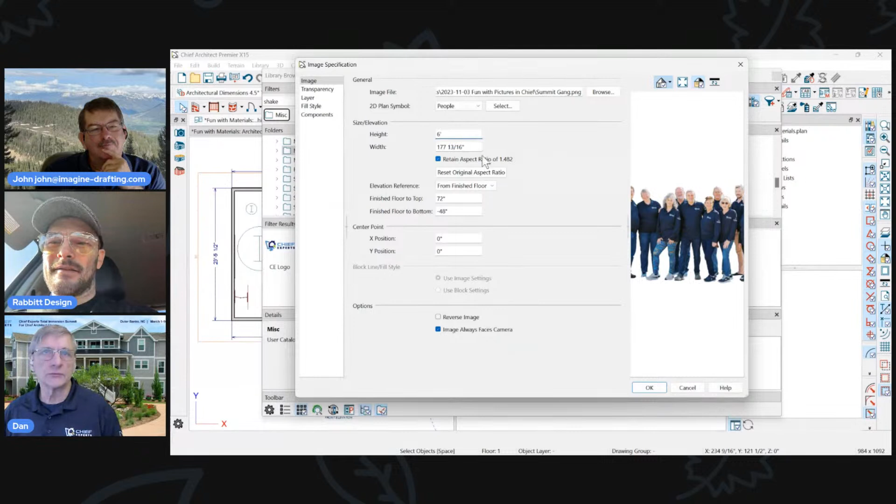Finished floor—oh, we got to set it here, 6 feet. And that's really all there is to it. And then you can have that image, it'll be in your library, and you can place it in your plan.

And see, there's the image it uses for people right there. But you can move that around, and you can rotate it. Now, what you want to be aware of with these kinds of things is you can have the image always rotate with the camera. So the image will always face the camera when you rotate your plan. So that's what makes that work.

If you turn that off, the image will stay fixed as you rotate the view. So when you now look at this, let's get out of here and go to here. And there we have another one. Oh, I set the image to be the top of it.

I adjusted down here, instead of floor to bottom should be 0. That's what I did wrong. There we go, so now we've got double the fun. Okay, so there's how you create an image like that.

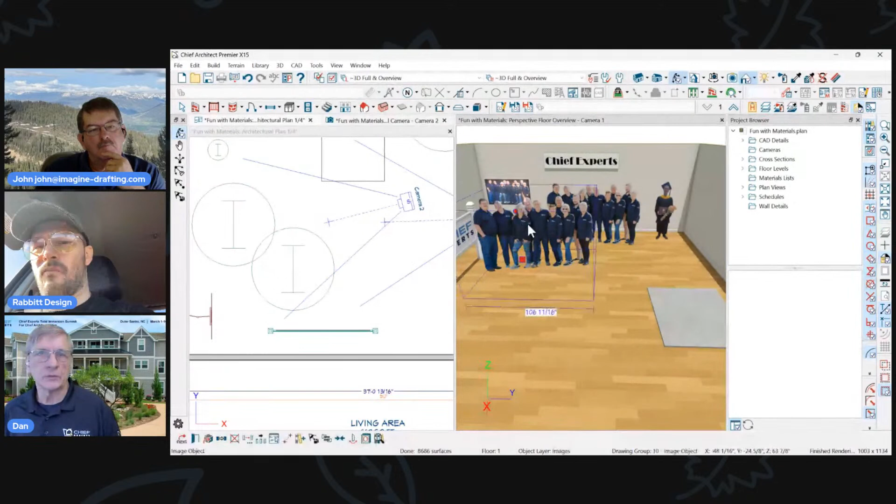So if you have a picture of your client or something, their pet, their dog, kind of a fun way to dress up your photo. Works pretty well.

Something like a TV, you want to put an image on a TV or on a picture frame or something like that in the plan, that's really easy. So you just, again, I could just go to my library, and you've got a couple ways to do this. I'll just show you the simple way.

Right click on here, new—this time we want a new material. Okay, we're going to create a material, not an image. So I'm going to go click on material. I'm going to go and name the material. I'll call this the Summit Gang.

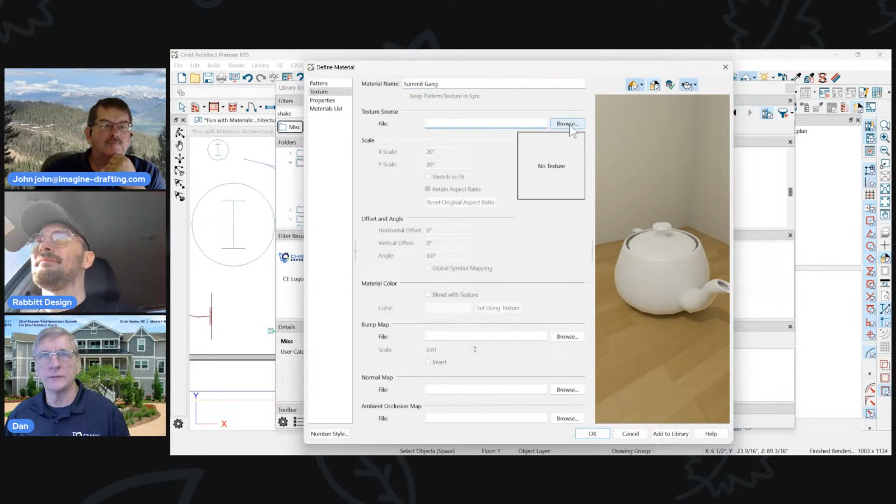And we're going to go over here to file. We got to find the image we want to put on here and go find that picture. If I did that one, it would have the background. If I did this one, it'll just be the people and nothing else. I could pick out any of these images and hit open.

So I've just created a new material. There's that image. Make sure you put stretch to fit on here so that we don't want it to tile the surface like a brick or something like that. We just want it to be one stretched out image. Click OK, and you can put that image on anything.

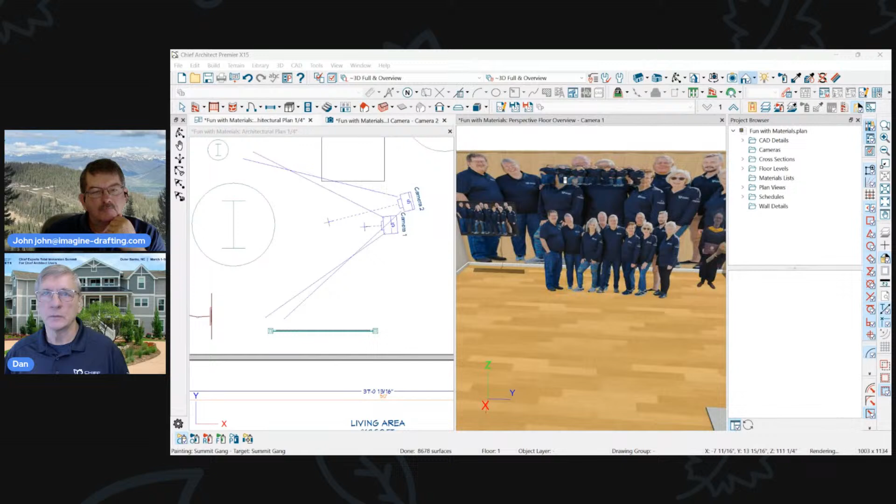So if you go back to your plan, right now I could just click on that, put it wherever you want. So there you go—if you want to create a really big image, you could do that.

So that's kind of fun. Those are the kinds of things you can do here. I've got a little sign that I put my logo on, same exact way I did the TV. If you want to brand all of your 3D views, put some job signs in your plan, put a job sign in front, put some plaques on the side and inside on all the 3D views. So if someone's looking at it, they'll have your logo on there. People go, oh, they did that.

It's assuming that you've had your client sign a waiver that says 3D images are just make-believe and they're not to be the real thing. Make-believe is the wrong word, but you get the idea.

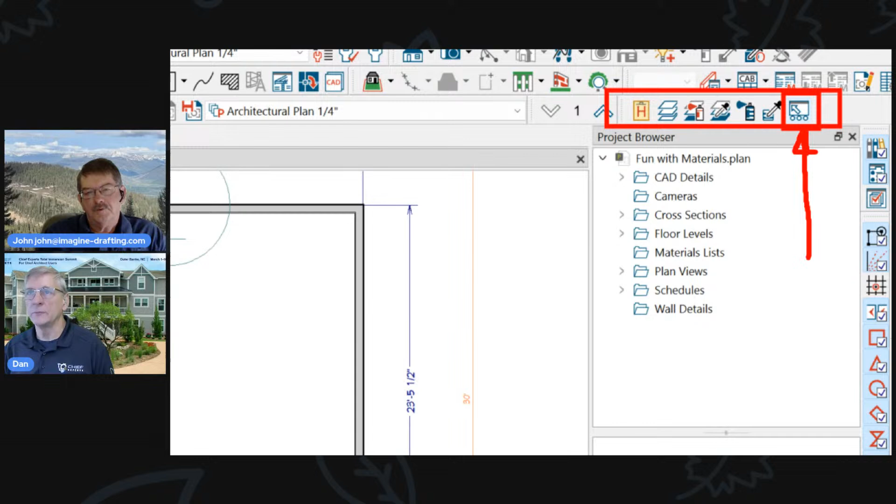Let's go create a tile. Let me show you a tool here in Chief that I use a lot, actually. I really like this little tool. These are the only icons I ever add to my toolbar, unlike Renee. I keep mine pretty simple, but this icon right here, a lot of you probably aren't even aware is there. It's kind of hidden under a menu. Under Tools, there's a thing called Screen Capture, and that's the icon I add to my toolbar. It's called the Screen Capture Setup.

So when I want to create a material, let's go in here. I want to create a tile or something like that. Let me just go into the 3D view - could be a 3D view, 2D view, doesn't matter. But I'm going to put some tile on this little piece on the floor, okay, this is the slab. Oh, look at that, I got you guys in here again. You're everywhere.

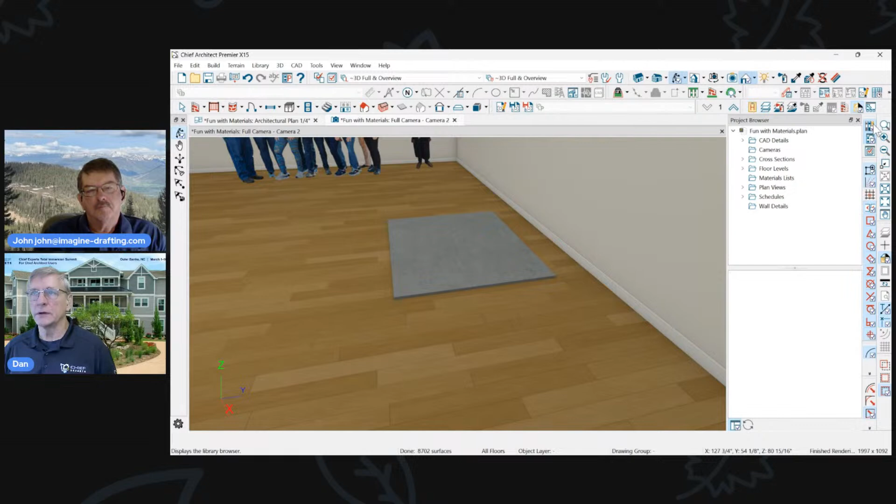Okay, and I want to create a material for that. So same thing, I'm just going to go to my library and right click on this, new. I like it that they've done this. I don't know how long it's been since we've been able to click on a folder because it goes right into the right folder right away. Used to be I would always click on the user catalog and then do it, and it would put it on the list. I don't know, maybe that's been there a while, I just never realized it.

Hey Renee, do you know, are they fixing this? Renee's gone, I think he lost his reception. Shoot, I was going to ask him if they're fixing this stupid library thing, because when you click on the user catalog, it shows everything. It doesn't show the folders, it shows everything, and I haven't been able to find out how to turn that off. So I don't know, what is this? Maybe that's it, include folders and text search. No, that's not it.

So when you hit the gear icon, you can turn the different windows on and off. I don't know if you've noticed that. So in the user catalog, select the folder, all it shows is the folder. It shows the folder, yeah. But when I click here, well it doesn't do it for these, it only does it for the user catalog. But if I'm creating a material and I'm not creating it in the folder and it puts it in the root directory, it shows everything. Anyway, it's kind of a pain in the butt. I don't like it, I hope they change it back.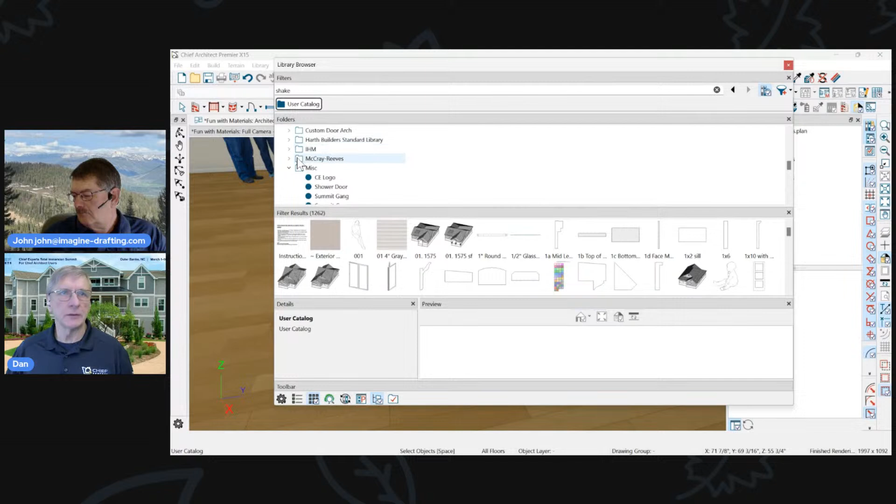Anyway, let's go back here. Let's go create some tile. I'm going to create a new material. Actually, I don't want to do it like this - I want to do it by opening a website. So here's what I'm going to do, let's just go here and open a browser window.

Let's go find some tile texture. I just put the word texture in because that's going to narrow down your search to give you images that are set up already so that they can be seamless textures. So if you do it this way, let's get one that's not licensed - let's just grab this one for example. Okay, so there's an image here of the tile I want, so I'm going to right click and save that.

Okay, this one's not letting me do a save. Let's try save the image as. A lot of these sites will protect their images, but I want that tile.

So let's go back to Chief. I'm going to go to Tools, Screen Capture, Setup. Don't capture, just always go to Setup, so it always opens this menu. Now you get a chance to choose which kind of screen capture you're going to do.

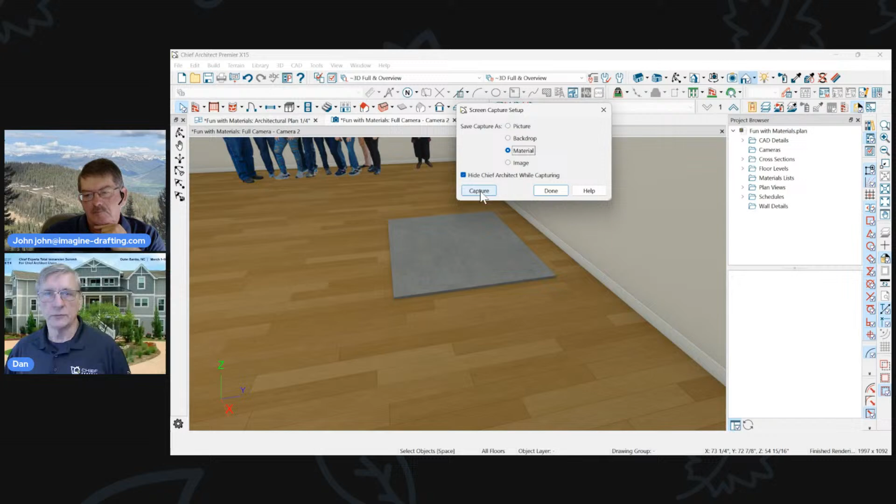I want to create a material, a tile material. I'm going to hide Chief when I capture, because the image is behind Chief, so I need to get rid of it. So I'm going to capture. Now I'm going to grab that tile, get as close as I can to the edge without getting the edge in. Okay, and there's the tile that I just grabbed.

Now it makes it really hard to find it because all of my materials are open in my user catalog. Where to go? Well, I'm just going to move it to a folder. I've been doing this where I just move this to a folder, and in this case it'll be under my CE library.

Where does it go? That's why they did that, Dan, to force you to move it, because you can't find the darn thing otherwise. Yeah, right. Well, I don't like it, because if you forget to do it, it's a real pain.

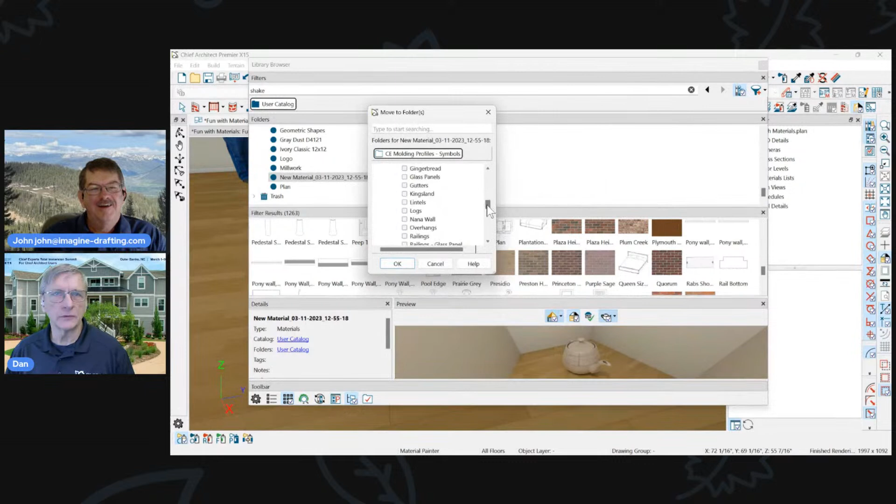Let's see, where did I put that? Here, it's under here, Miscellaneous. I created a folder called Miscellaneous. I thought I did. Whatever, I'll just leave it there for now. Okay, so there it is.

So I'm going to open that object, and here's that tile. I'm going to turn off stretch to fit because I want it to put itself over the surface. This is where I'm going to need to do some calculating to get that tile to be the right size. This is where I might put that 3D box on the wall, or, because here I've got different sizes, so I don't necessarily know what sizes there are.

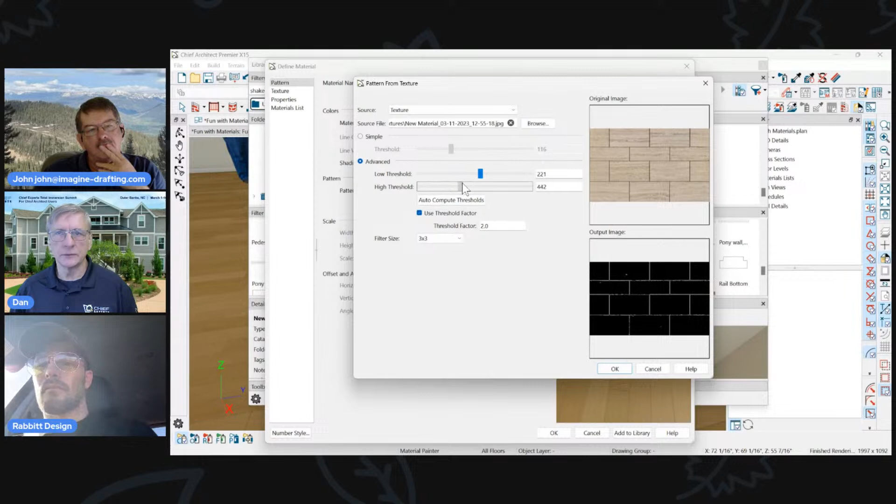I could try going to my pattern and say pattern from texture. Let's see how it does. Let's turn the threshold up a little bit more. Let's see if I can get close. Not the greatest, but let's try it. Let's click OK.

Now let's go put that on something. So once I've created it, all I have to do is click on it here and then spray it onto the surface that I want to put it on. So that looks pretty good, it matched up pretty well. I could put it on a wall if I wanted to, or anywhere you want.

So can't put it on the people though. So Renee's back, Renee's back. You could ask him that question. Oh yeah, Renee, in the user catalog... you there?

Yeah, I'm here. What's the question? When you click on the user catalog, it shows every symbol in the user catalog, even if they're in folders. It's really a pain in the patoot.

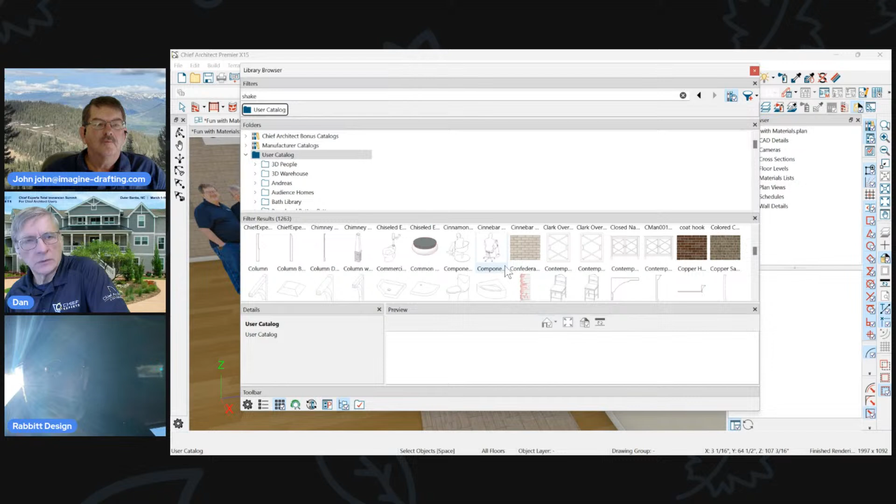Uncheck the little icon at the bottom. Which one, this one? Yep. Oh, there it is, I didn't click on that icon when I was playing with this. Thank you.

But now it doesn't include the images of the subfolders. That I don't like. Because it used to include them. Yeah, they changed that. It used to show the first item of each folder, which was kind of handy.

I kind of stopped browsing through folders like that because the search tools are so much more powerful, since we can search by classification. But someone new to Chief isn't going to know that. So that's interesting. Okay, so it works here, it's showing the first item in each. Oh, whatever, we won't get into that right now.

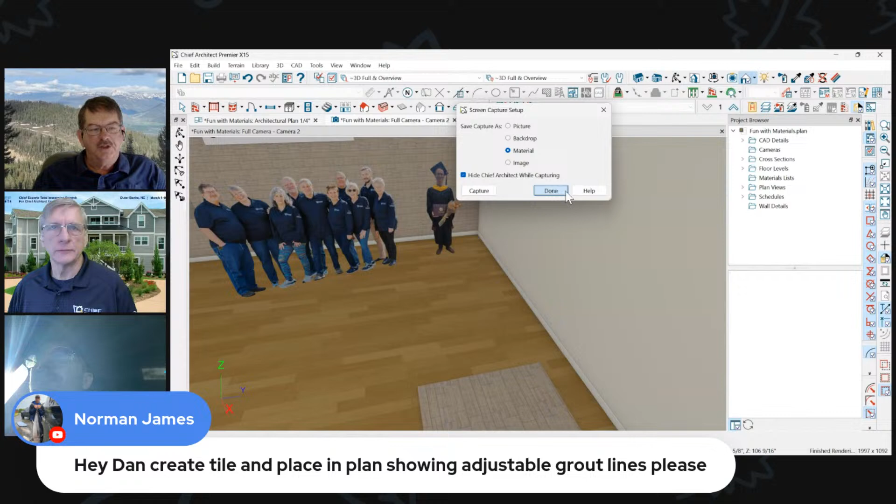We're almost out of time, but we got one question here. Dan, can you create a tile and place it in plan showing adjustable grout lines, please?

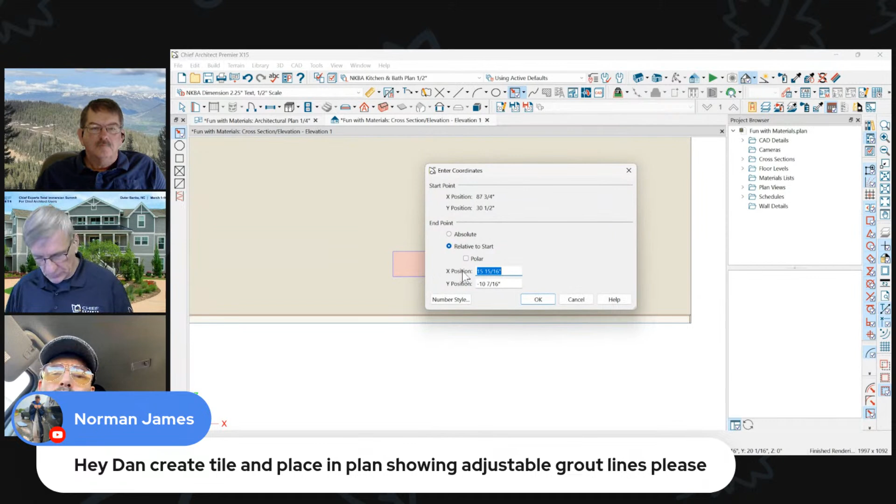Not with an image, no way to do adjustable grout lines with an image. You'd have to draw that yourself, third party, or manually. So for that, what I would do is go into where I'm going to draw that. I like to draw it in 2D because I can grab and move things. So if I'm going to create a 6x6 tile, I'm going to go create that tile, and then I'm going to start doing some copies of it.

Maybe I'll start down here. So you're drawing it exactly how you want it laid out. I'm going to do my multiple copy, go 6 1/4, and drag this out with my right mouse button, drag it up. If I want to put something in between here, I'll grab a strip and move it up.

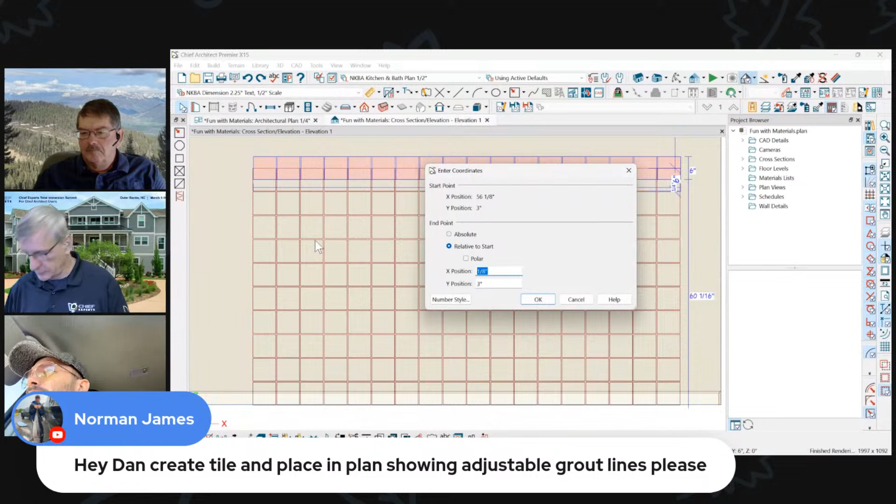3 inches. Oops, I moved it the wrong way. But it's nice to start moving it and then hit tab, so that should be 0 and this will be 3. Now I've created a space in between, and I could create that sizzle strip in between here, once I get one of these put in. Of course, I didn't hit my copy button again.

So this is how I would do it sometimes. I don't do this a lot, but the only way you're going to get adjustable grout lines if you don't have the right image is to draw it in your plan. Once I get this all drawn out the way I want it, I'm going to group select it. As long as you get this image down here, if I try to group all of them, I don't get the magic wand, so sometimes you have to do a few at a time.

So I'm going to grab those and make this out of a material region and click OK. Now I can adjust that to be what I want it to be. I can edit this to be whatever I want. And there we have our tile in there, which I would typically use just a solid picture, I wouldn't use the grout line tile. I could also go change that real quick by using the spray can.

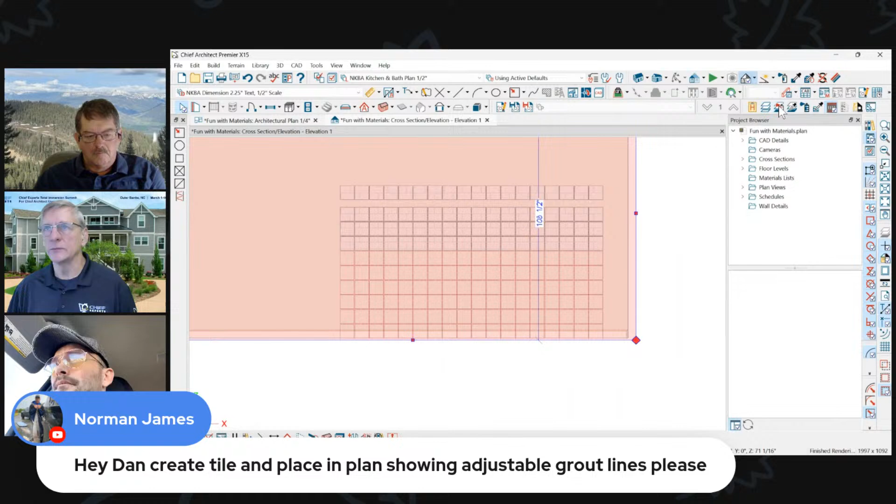Let's go find a tile, that is a single tile. Come on, let's just get that one. Now I'm going to click on one tile, but before I do that — change everything in this room that is made out of that tile is going to change at once.

There's all that tile. You could do this once you created the 3D thing too. The trouble is you can't group select. That's why I like to draw — because I can't group select those now, except from the floor plan, but here I can group select those. So that's why I like to draw it with 2D first, because it's easier to work with, and then I convert it to 3D. That works pretty well.

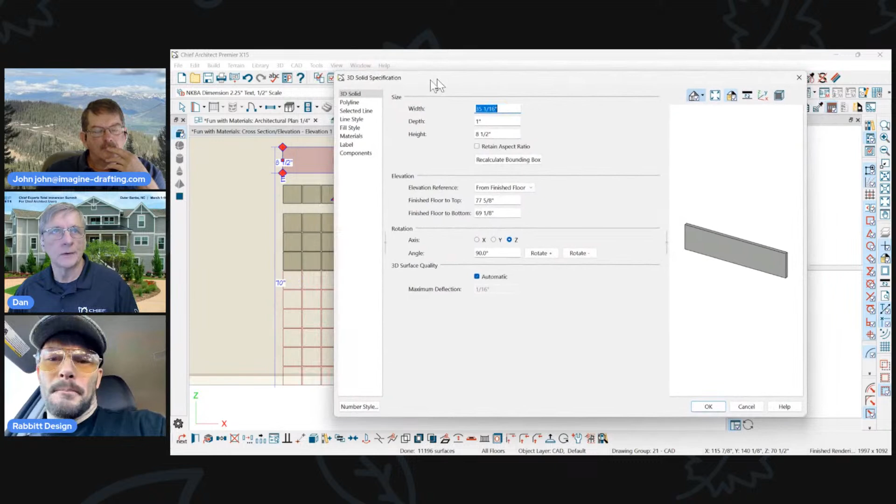And then what I might do sometimes is I'll just put a thinner material behind that. Just put that in there. No reason not to do this in floor plan because of what you just stated. I agree, but again...

It's kind of a brain twister. You naturally want to put it on the wall because it's a wall thing, but we could do it in 3D and use the XY copy and all that good stuff too, and that could work just fine. What am I doing here? I'm setting the depth at 1/4 inch, and then I could just put that behind the tile, of which I don't have it against the wall enough — oh, because I have it too thick.

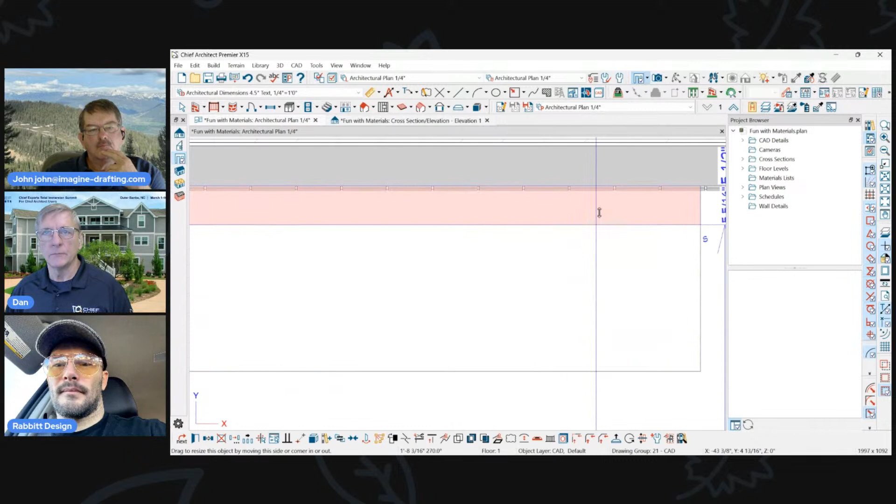Come on, get in there. There you go. So I can grab all this stuff if I use the marquee select. I might get the one where I do the contained objects, so I don't get the wall too. Now I could move those away.

What was that question? Oh, I said I got to get going. Okay, yeah, I think we're done for the day anyway. I hope you have a good, safe trip. You guys, we'll see you next time.

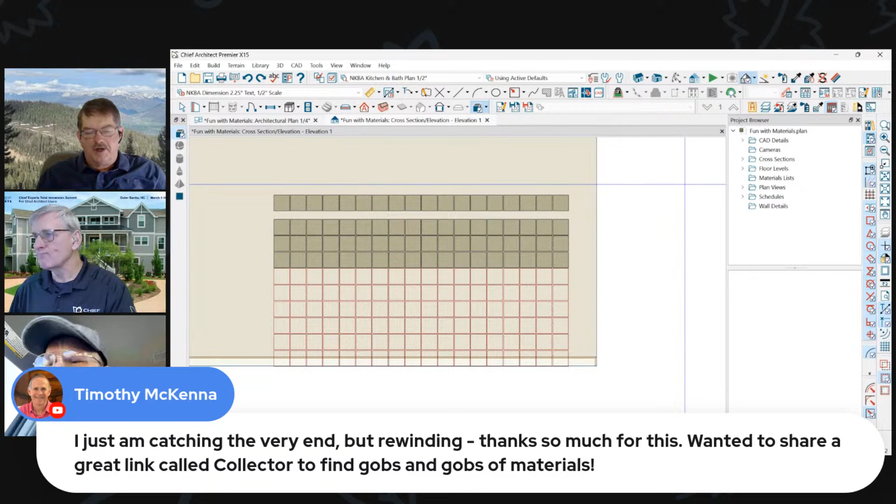Before you go, Renee, have you heard of this collector for materials? I have not, it'd be great if they could post a little link to that. Yeah, I tried Googling it, I can't find it. So Tim, if you can add some more information here quick, that'd be great. Yeah, there's a ton of material sites out there that you can get a lot of materials from. Again, what you're looking for are seamless textures, so if you can get your hands on those, you're good to go.